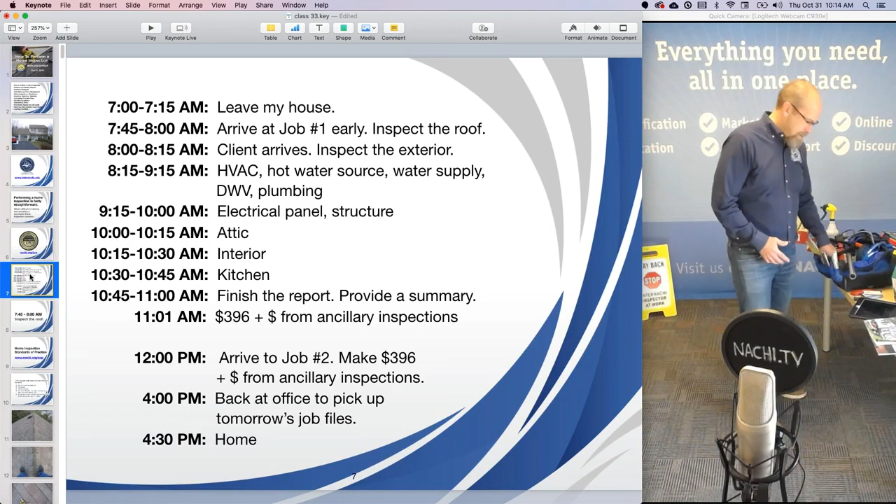That's great money. So I start early, 7 o'clock. I want to arrive at my first job early. Where I come from, if you arrive on time, you're late. So you arrive early and get your stuff, literally your tool bag, your appearance, get your business card out, get your tools ready, maybe even set up your ladder if you're going to use a ladder, ring the doorbell, introduce yourself, make sure the neighbors know about you, stick a sign in the yard, maybe some door hangers. Get yourself ready to do an inspection with your client, because arriving late is just a terrible first impression.

And in this business, you never actually meet your client until after they hire you, and you meet for the first time during your inspection, right? So you want to arrive early so that you're not sweating and you're kind of calm and ready to go.

Well, what I did was I arrived early and introduced myself to the seller if they were home occupied, and then I got up on the roof. I did a roof inspection. That's the hardest, most dangerous thing. You're not required to walk upon any roof surface, but you're required to inspect the roof. So I did the hardest thing that didn't require me to meet my client, or meet anybody. I'm on my own, so I go up on the roof.

If I had extra time, I'll start the exterior. And by the time I get down from the roof inspection, from my ladder, my client's there with me. So my client arrives around 8, right? And we inspect the exterior together. And it's only about 15-20 minutes to inspect the exterior.

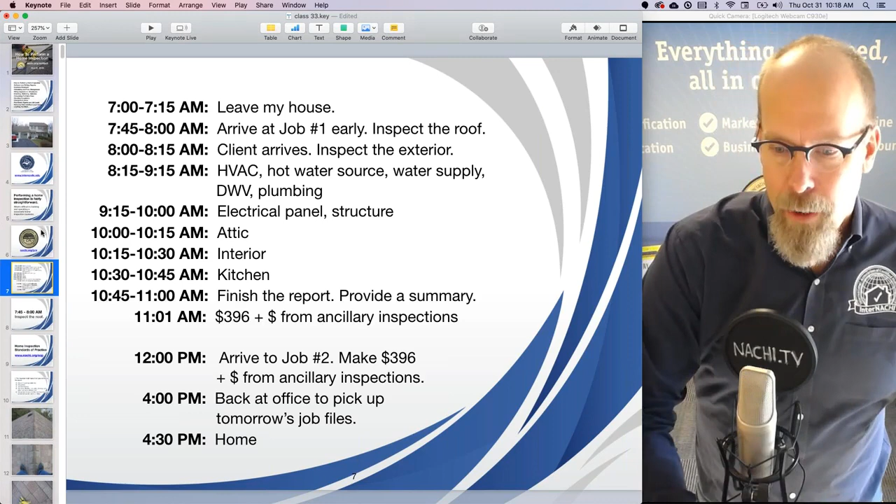And at about 11 o'clock, I'm finishing up my first inspection, my morning inspection, and I'm swiping a card, right? And I'm getting paid immediately. And my report is actually written, and I send that out electronically. You can do PDF or online report, but send it out because I am not writing my inspection report at night. So I'll show you how I do 2 inspections a day by doing 1 inspection with you.

So I get there early and I inspect the roof. You're required to inspect the roof. You're not required to walk upon any roof surface.

It's dangerous to get up on a roof. Stay on the ground if you can.

Home inspection standards of practice. I use this as a guide, as the foundation upon which to build a very successful home inspection service. It's successful because it guides me along. It tells me what to inspect and what's not required to inspect, and it helps me reduce my mistakes and my exposure to liability. It's a checklist, and if you go there, it kind of looks like this.

So here's the InterNACHI Home Inspection Standards of Practice, and here are the sections: roof, exterior, basement, heating, cooling, fireplace, and attic.

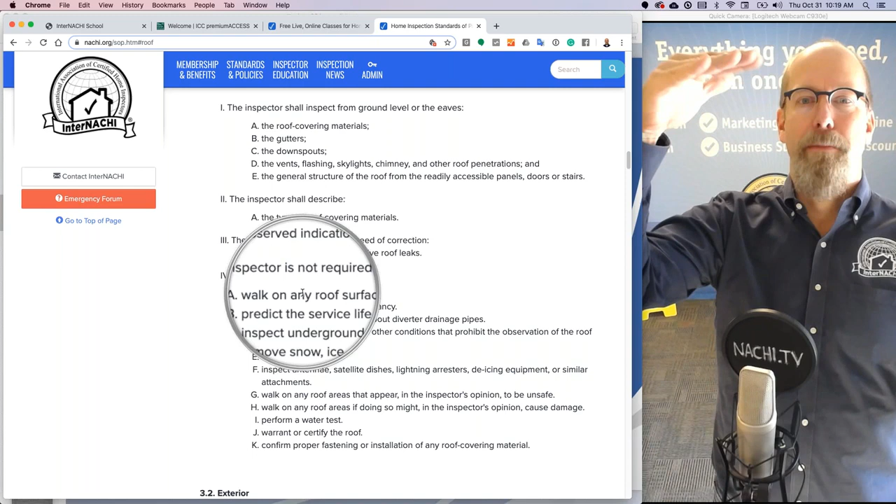And here's the roof. You click the roof and it says the inspector shall inspect from ground level or the eaves. An inspector is not required to walk on any roof surface, even if it's a flat roof on a 1-story building, a pizza shop or a condo. 10 feet up, flat roof—nope, you're not required to walk on any roof surface, according to the InterNACHI standards of practice. If you have a local standards of practice, you ought to refer to that.

Okay, so that's at nachi.org SOP. Let me show you what I use—let's see if I can get this to work. I use this as a guide.

So I have my... let's see. If I can get this to work, I'll show you my software.

So here's my inspection software on my phone, and so I go to my report, and here are the things that I'm required to inspect. This is mobile software on my phone.

Let's open it up a little bit. It's a brand new report, so I haven't even taken a picture of the house, but I could actually if I wanted to. So I take a picture like that.

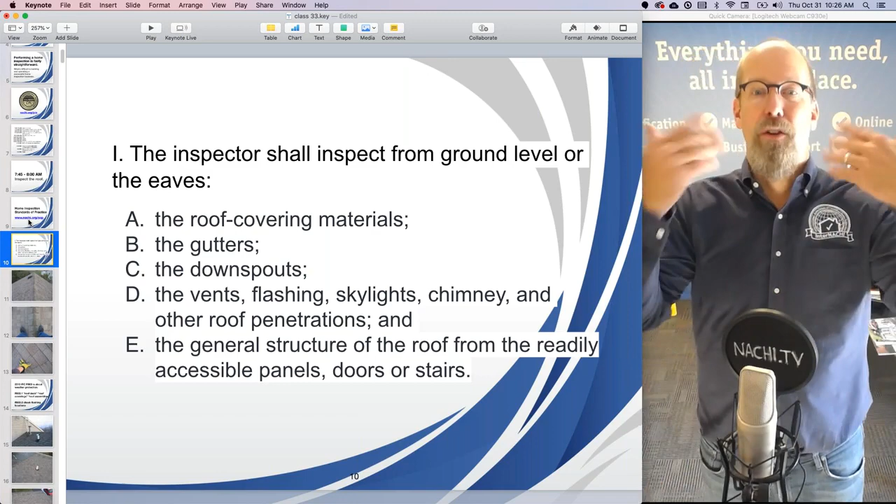So that's an example of how you can be technically competent at performing an inspection, but kind of miss out on the business strategy. And you're wondering why your phone's not ringing, because there are other inspectors who are providing incredible value. In business, you have to figure out how to provide incredible value that's greater than the cost of getting that service.

According to the standards of practice, you're required to inspect these things. So I get up on the roof. Again, you're not required to get up on any roof surface, but I get up on the roof because that's part of my brand. I make sure that picture and that picture are in my inspection report, which are passed around, and I make sure those are on my website as well, and part of my marketing flyers that are designed by the InterNACHI member marketing team, all the design work is free.

And if you wanted to get very good at technically what is required to inspect, maybe based upon code - we're not code inspectors, we don't say code, we say things like standard or best practices - but if you wanted to know what does the code book say about inspecting a roof, well that's an excellent question. I refer you to the International Residential Code. The most recent iteration is the 2018 IRC, and section R903 is about weather protection.

They talk about 3 things: roof deck, roof coverings, and roof assemblies. And you ought to consider using those terms as well. So roof deck is that which the roof coverings rest upon. You have asphalt shingles, and that's roof coverings, and they rest, and are fastened to and adhered to the roof deck. That's the structure that you walk on if you're going to walk upon any roof.

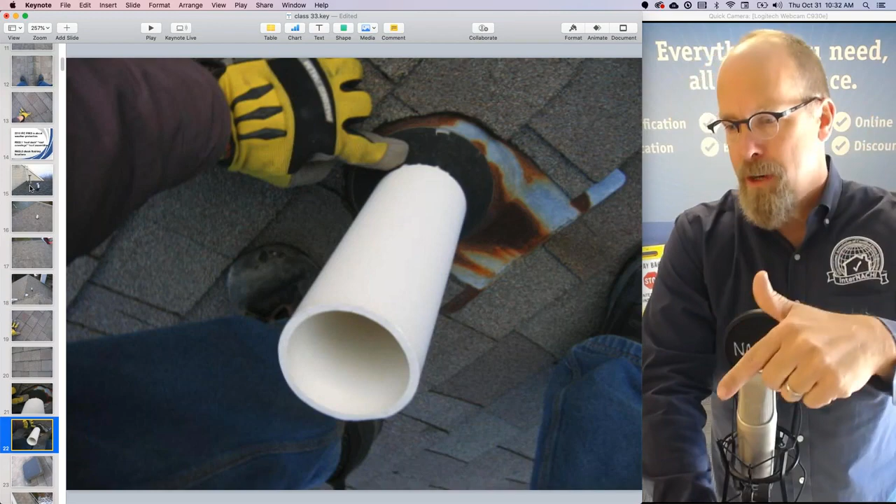These are pictures that I took during inspection. I take pictures of every plane, every surface, every component—there's the roof covering. There's my finger touching the rubber roof membrane around the vent pipe that penetrates through. Flashing is required, and if it's torn or damaged, that's a defect. It's not a minor defect—homeowners don't have the skill set to replace or fix something like this. It needs a professional, so that's a major defect. We'll go over some terminology about the differences between them.

There's a roof vent, the gutters are filled. That gutter looks okay, I like that shot. It kind of proves that I was there up high where no other inspector goes. So that's part of my brand.

I use any kind of ladder to get up there—there's a collapsible ladder. I hate that they use that term, collapsible ladder, because it could collapse. But just to get up to the very top, I'll use anything I can. Drones are great, sticks, painter sticks are great. Watch, don't get electrocuted—it shouldn't be metal, it should be non-conductive material. Binoculars, anything—you've got to inspect the roof.

And so I get up on a roof because, well, I built homes. Before I was a home inspector, I was a builder, and I learned how to do it safely. So I have the experience, the skill set needed to get up on a roof safely. I don't recommend you doing this. However, you have to figure out how to beat me in the market if I have that advantage over you. If there's a value proposition that your home inspector is going to get up on any roof surface, you have to figure out how to beat that in the marketplace.

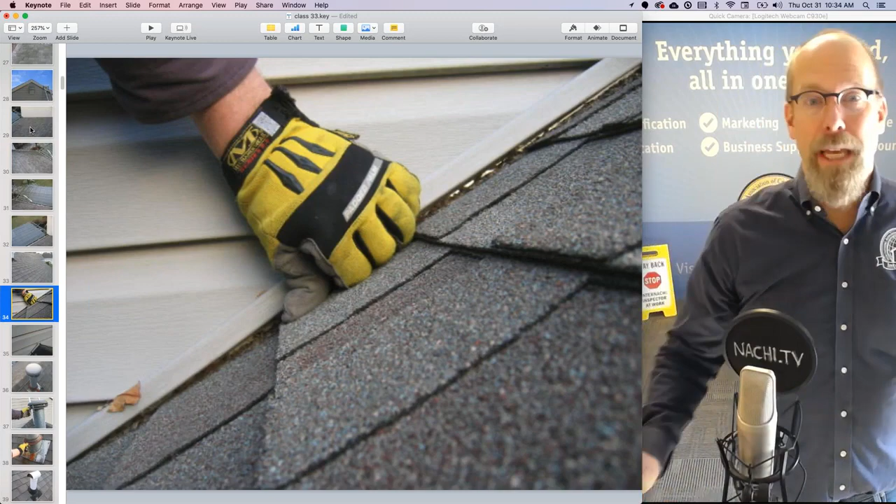So there's the sidewall—there has to be flashing there. It's hard to see the flashing in those areas because it's covered by the siding and the roof covering, but that is an attempt of me to confirm that there is some type of flashing there. I can't see everything, but I just want to confirm that there's some kind of step flashing installed.

But for gas, it's 2 feet.

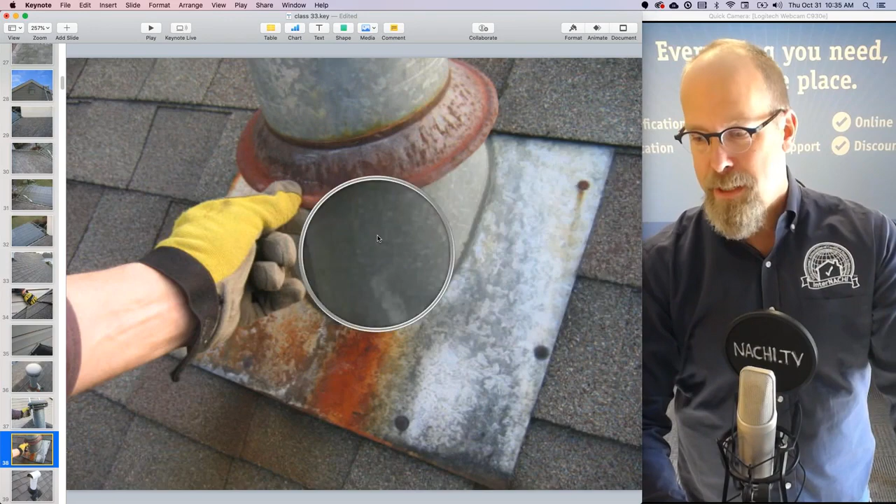Wind-driven rain can go sideways. It's very easy for water to go here. There's 4 to 6 inches of distance to get to the hole for water to penetrate through. These are not sealed. They really shouldn't be exposed. It wasn't installed very well.

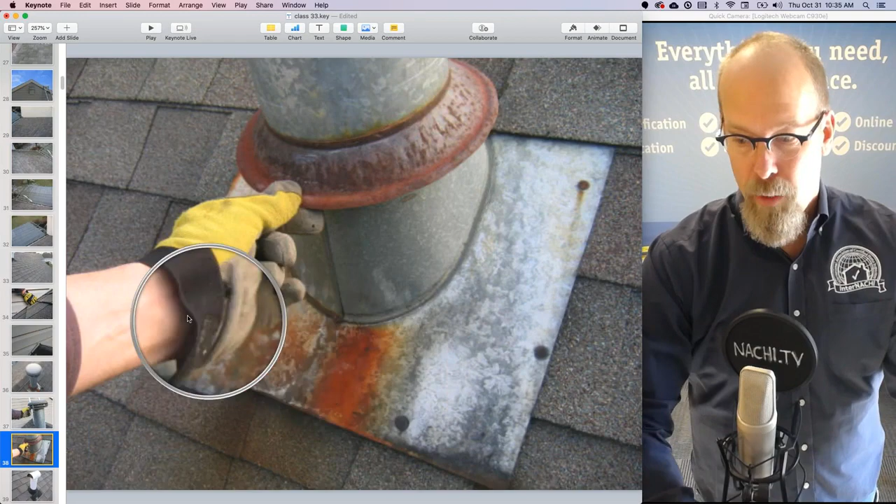I would have done it in a different way where this shingle row comes all the way across and this is all shingle covering, and you only have a little tab here and you don't even have to fasten it. So there's some tricks to doing flashing well, and I don't think this installer did it well.

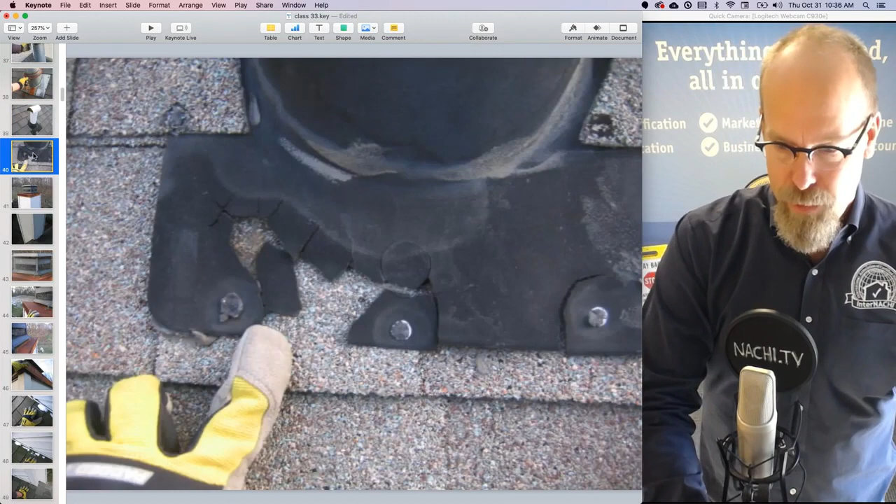So I'm going to pay attention to the underside and see if I can get underneath and look for water stains. If there are water stains, I'm going to call it an active roof leak. This is a problem. This boot here, this flashing rubber is just destroyed. And any roof nail fastener that you can see the head of is a potential water entry point, and that's a defect. It's a major defect because most homeowners can't even get up on their roof. So you need to hire somebody to get up on there.

I don't like the staining rust. It's not very old. I'm going to tap it with my screwdriver, but I don't want my screwdriver to go through anything that's rusty. This could be prepped and painted to preserve the integrity of the metal capping. So that's what I'm going to ask my client to do prior to closing, and then they can negotiate over it on what to do.

You can't force any seller to do anything. So I'm working for my client, and that's a concern that I have. There's step flashing at where the sidewall of the chimney meets the roof covering, roof surface. And that's about it for my roof inspection.

Angela says, seems like an awesome schedule. It just seems unrealistic with the way clients schedule with me and their realtor schedule. Yep, you ought to, I would just directly ask, if you're working with real estate agents, why don't you ask, what would be a good schedule for your best home inspection experience? Let the real estate agent tell you that, yeah, I really like 8-hour home inspections. I've never heard of an agent who loves a really long inspection.

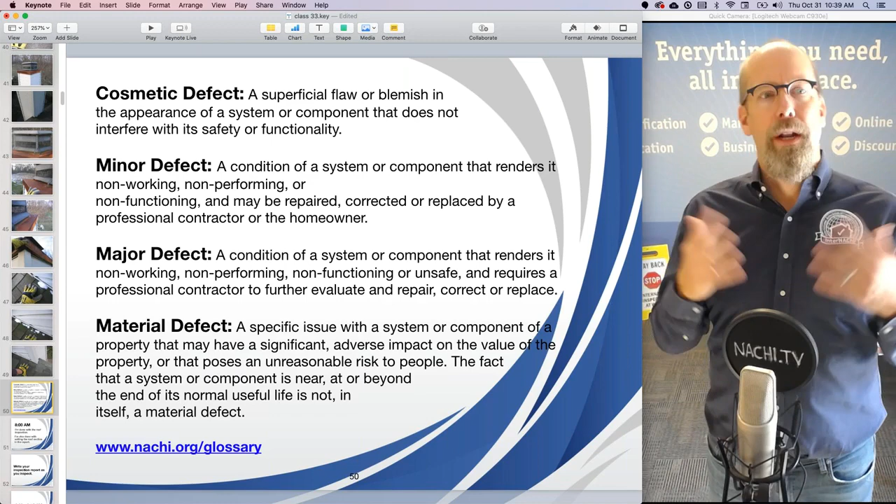Business strategy is to address your client while they're there. If they have a concern, I want to address it right now. I hate when my clients are not there, because inevitably they'll have a series of questions about what happened at the inspection - what did it smell like, what did it look like - and they don't know because they were in California and I was in Pennsylvania or something like that. So I want my client with me.

That's why video is great for absentee clients. You do a video, you do a body cam. I got a body cam somewhere around here, and you record everything and play the video for your clients. You want to address your client's needs as efficiently as possible, because that could be a drag on your process.

Which program are you using in your report? I like HomeGauge, I like Home Inspector Pro. There's EZ, there's Horizon, there's 3D. I have on my phone Spectora, spectora.com. Go to nachi.org/Spectora, and you can find some information there and a video about this software. So I try to learn every software that I recommend, and right now I'm learning that software.

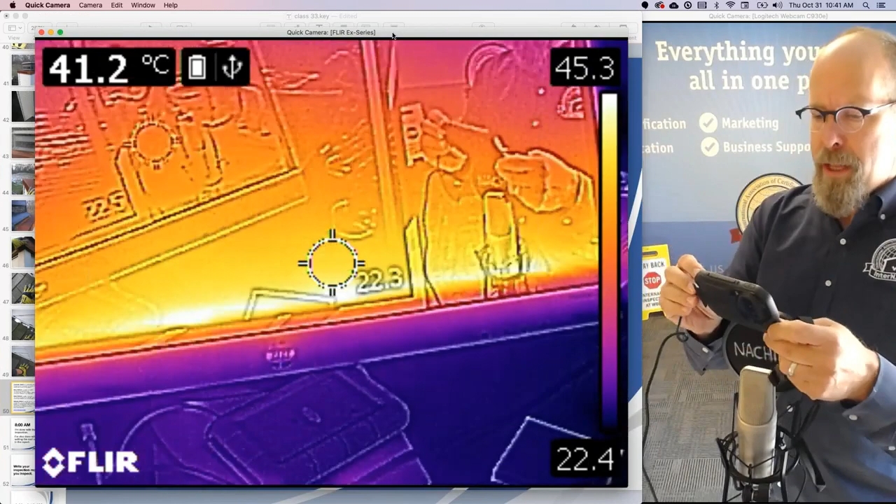So here's my infrared camera. And I use infrared because it helps me do a better job as an inspector. And if that's one of the main purposes, helping me do a better visual inspection, then I'm not really going to invest a whole lot of money into a camera that's going to be kind of like a flashlight. So an infrared camera is like a flashlight. Don't freak out about infrared.

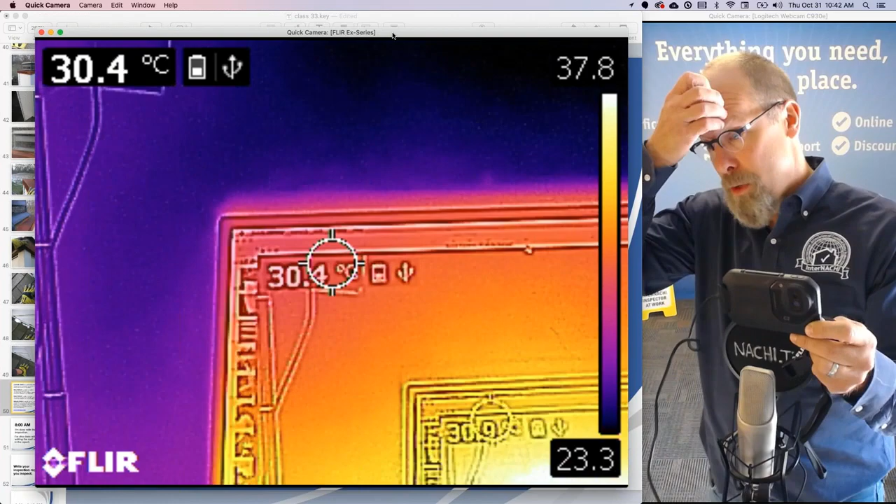This is a FLIR C2, one of my favorites. The C3, I'm having problems with the Wi-Fi and the connection between that and my computer, but the C2 is really cool. There are others, I think an E5 or E8 or E6. The more money you spend, the more you see, basically. But I see it just fine with this infrared.

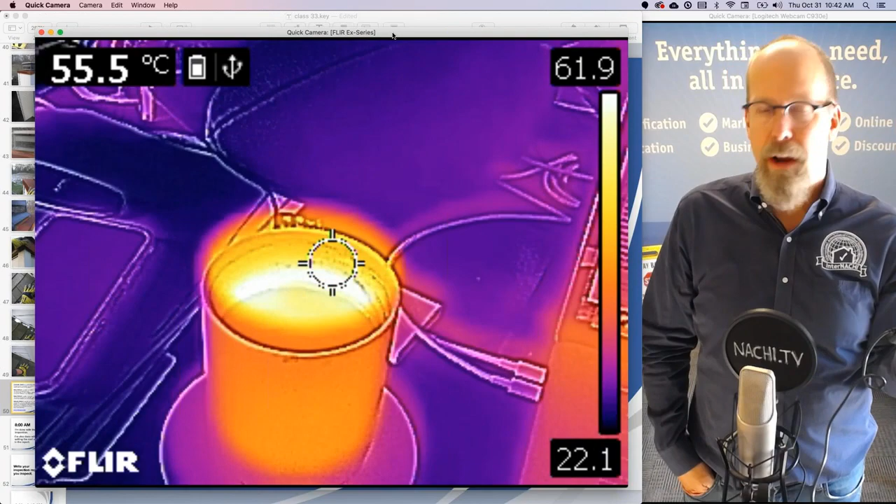And there are things that you have to learn how this works. You don't want to interpret images incorrectly. So you want to make sure that you are using the infrared to help you see things that you wouldn't be able to see otherwise. And it's like a flashlight. The word flashlight, is that a flashlight right here?

The word flashlight doesn't appear in the standards of practice. So one could argue that using a flashlight during a home inspection is exceeding the standards of practice. That'd be that one. So here's a flashlight. It's a really good flashlight. And it allows me to see things I wouldn't normally be able to see without it. So a flashlight allows me to see under, in that corner, under the table, right? Because without it, I can't see much. But with it, I can see things I wouldn't normally be able to see without using a flashlight.

And every home inspector is okay with using a flashlight, right? Same thing with infrared. An infrared camera allows me to see things I wouldn't normally be able to see without it. And there's the table there. And the cool thing about infrared is I can see things that are cool and warm. It's temperature differences. So that is a cold area right there. I bet there's a lack of insulation underneath the wall outlet.

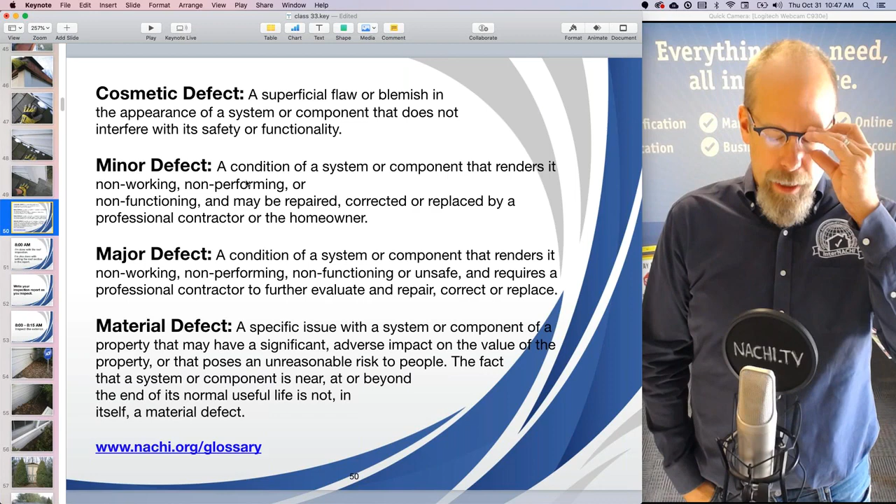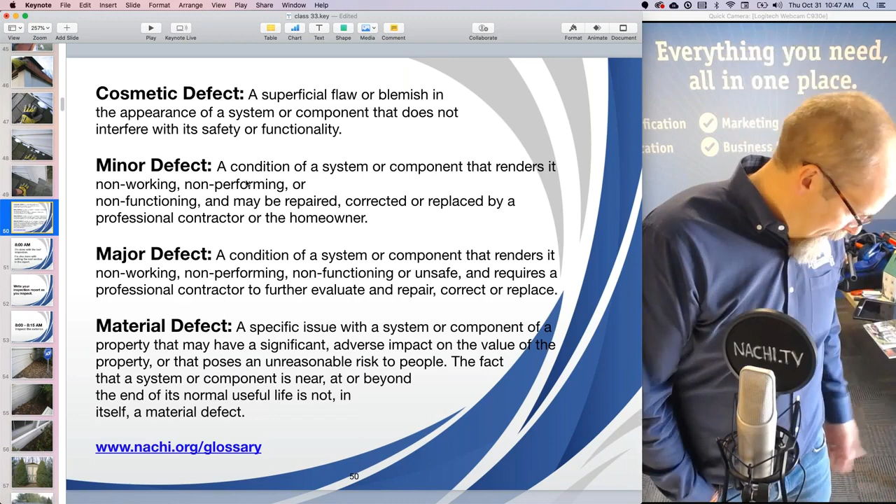A minor defect is like a dirty air filter, and a homeowner should be able to do it because it's a maintenance kind of thing - air filters can be changed out. Cosmetic is something that really doesn't show up in our report; it's not really part of a home inspection's scope. It's like a burn on the carpet from an iron, or a stain, or a hole in the drywall from a doorknob hitting it. It's cosmetic - I put it in my reports as courtesy only.

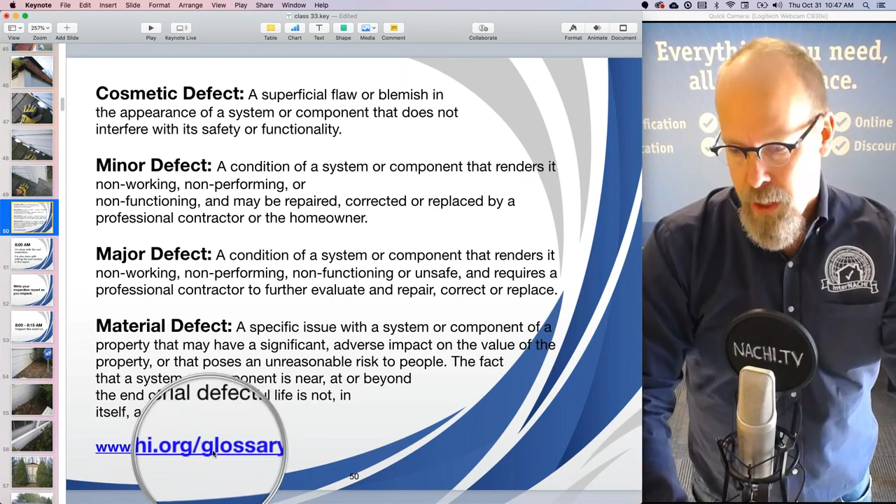These terms are defined in our glossary at nachi.org/glossary if you wanted to use them. Remember, we talked about roofing terms - roof coverings, roof deck, and roof assemblies. These terms are in our glossary, nachi.org/glossary.

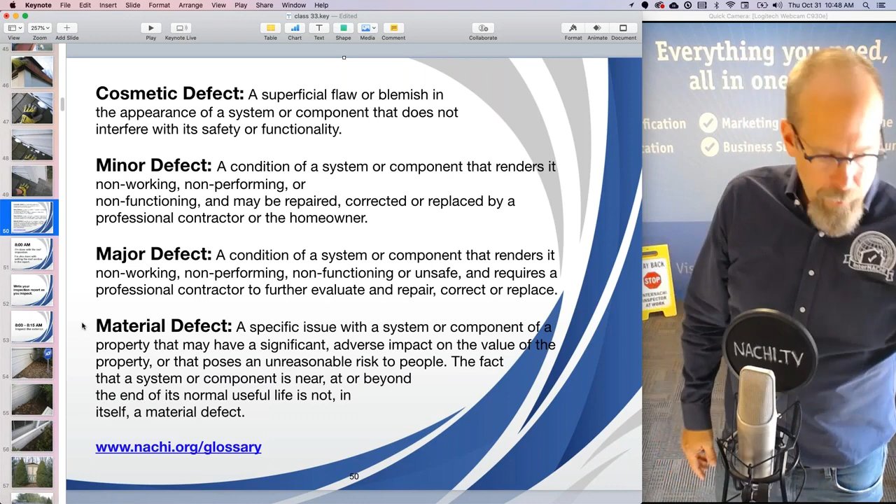Are you required to find every defect in a home? You're a home inspector, right - isn't that the purpose of having a home inspection, to report upon all the defects in the home? No. A home inspector is not required to find all of the problems in a home. A home inspector is required to report upon only those defects that they both observe and deem to be material.

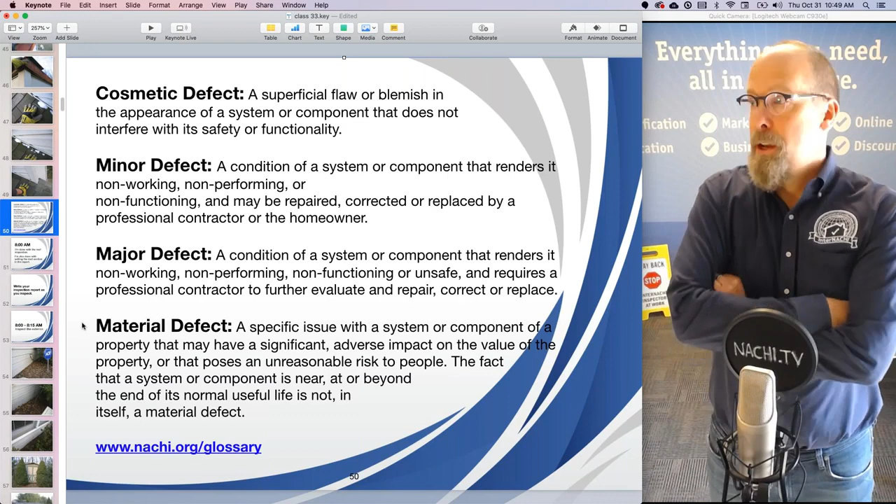So if there's a terrible defect above me right now and I don't see it, it won't be in the report. I'm required to report upon things that I see within the scope of my home inspection and that I deem to be material - so bad it's going to hurt somebody or have an adverse impact on the value of the home. If none of those things happened, it's not in the report. I can't see a defect behind that wall - that's why you need everything in one place. That's InterNACHI - everything you need all in one place.

The seller moves the cabinet as they leave the house. The homeowner comes in - there's a huge crack in the foundation with water streaming out of it. Nope, I didn't see it, couldn't see it, can't report upon it. Now let's say I did see it - let's say I saw a vertical hairline crack, no displacement, no separation, no water. I saw the crack and reported upon it - took a picture of it, crack in the foundation wall, hairline crack or something like that.

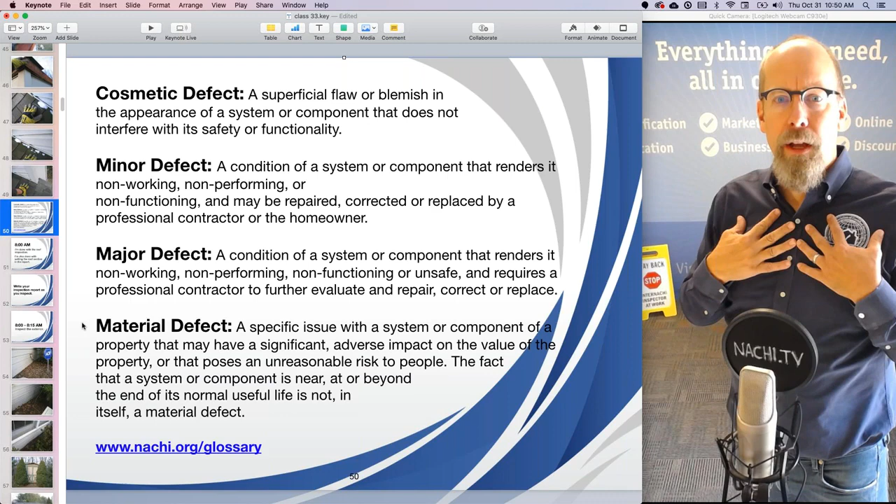Later on, it moves and leaks water. Well, I'm not required to predict future events. If the foundation looked in good shape when I took a picture of it, I'm required to report upon the condition at the time of the inspection. If it leaks water through that crack a week later, I am not responsible for it. This is not a warranty or a guarantee.

So if you get a call saying, hey, I just moved into the house and there's a crack in the foundation, you should say, wow, I don't think I saw a crack in the foundation - I'll take a look at my pictures and my report. I don't remember a major defect in the foundation. Could I come over and see what you're seeing? Yeah, come on over.

And when you come down into the basement or somewhere in the house and there's this big defect, from 20 feet away, you should go, holy cow, look at that. You know, that wasn't there during my inspection, right? It must have been covered up or something.

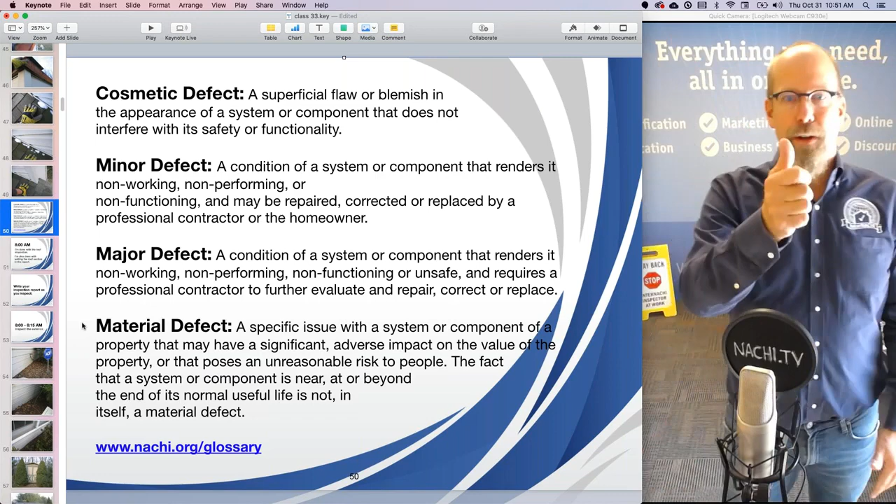And then you take out your pictures and scroll through them, because you take pictures of everything. Take pictures of the whole room. I'm trying to figure out how home inspectors can take a 360 picture and image. So you just click and move on. Every inch of every room is captured with a 360 camera. The 360 cameras are coming.

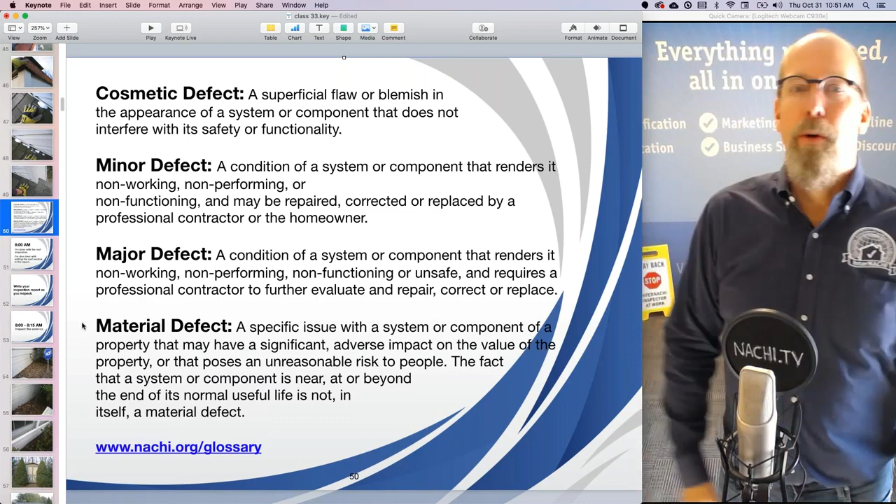So you want to document what you see in your report. And you're not required to report upon all the defects, only the ones that you both observe and deem to be material. Now that you know that, home inspection is a lot of fun. You're not required to find everything.

I'm going to use a flashlight, maybe infrared, to see more than I could see, to make my inspections a little bit better. But I'm not required to report upon all the defects. There's so many defects in this room right now. I have no idea - could be electrical problems in the wall, could be water, could be mice under the carpet or something. I have no idea.

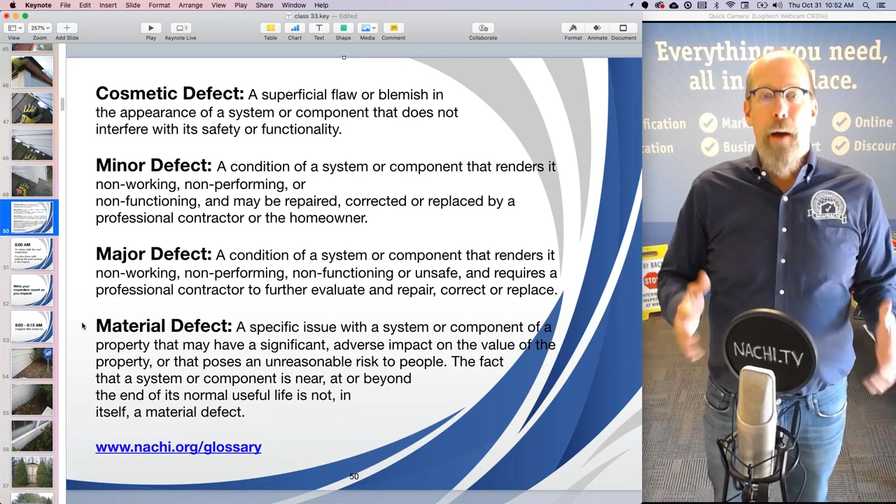I'm only required to report upon the defects that I both see and deem to be material, serious stuff. Now you can have fun making a lot of money.

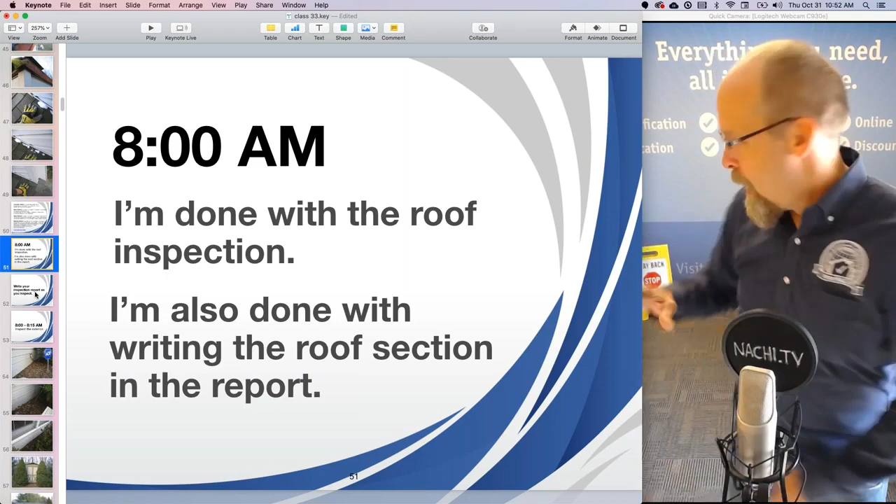We haven't even got to 8 o'clock yet in my first inspection. Let's go. I'm done with the roof inspection, right? I walk around, using my mobile software, taking pictures and video, writing the report. And before I step down from the roof, I'm done inspecting the roof, done taking pictures, done capturing video, done with everything.

And now I go down and meet my client for the first time after they hire me. Big smile on my face, shake hands, five business cards, because they're going to pass them out a little bit. Never give one business card, five at least.

So talk to the real estate agents and tell them about the roof. There's a couple defects on the roof. What do we have? The roof covering looks good. Gutters are filled. Rusted metal on the chimney cap. We have a flashing problem around a couple of the vent pipes. You think of anything else? No, that's about it. Would you like to go inside and take measurements and do things out there? You won't miss a thing.

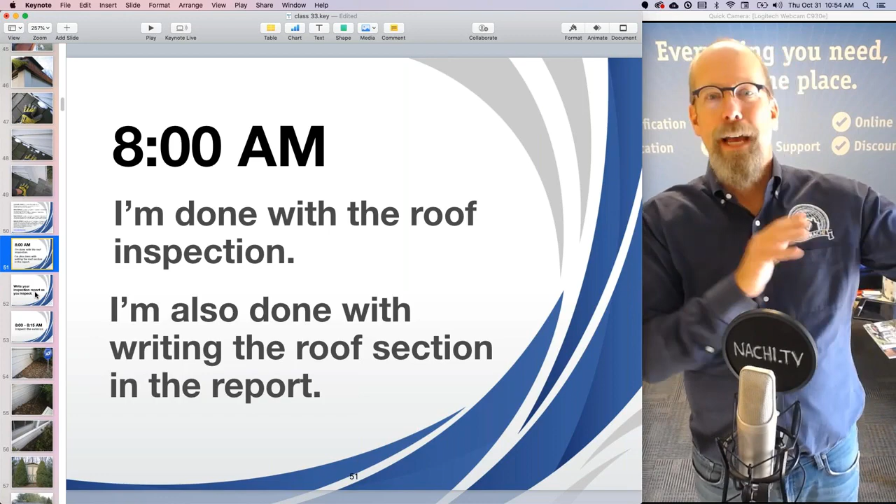I'm going to walk around the exterior and perform the exterior inspection, takes 15 minutes or so. I would love it if you come along with me, because we can address issues. About half of my clients just want to go inside. They want to get to their ideas of renovation and doing the kitchen, painting, carpeting, drapes, and all that stuff. And when I come in from the exterior, I tell them any defects I found, and then I go and do the other systems.

So write your inspection report as you inspect. I inspect the exterior in about 15 minutes. Let's do it, okay?

Let's see if we got questions here. Getting on the roof can damage the roof by disturbance or granular loss. Yeah, Angela, you can - especially on a hot roof, you can twist your toes, twist your foot.

Let's see if I can get it on camera. I'm not very good at this. So you can twist your foot like that and damage the granular surface of a hot asphalt shingle, so you don't want to do that. These boots are actually spongy soft. I'm not doing roof inspections in them, but you can find shoes that look really good and protect your feet, and are very soft for the roof.

Some folks use special boots and shoes just for the roof. I used to use sneakers for the roof, and those are really nice. If it's too hot to walk on and you think you're going to damage it, don't.

So it's possible to damage roof covering materials, especially like tile. I don't walk on tile, I don't do slate. Metal roofs, I'm careful with because I'm not sure what the roof decking is like - sometimes I'll step on a metal roof and be like, oh. So be careful. Asphalt shingles is kind of fun, but that's for me because I'm experienced and safe doing roof inspections and walking on a roof. Remember, you're not required to walk on the roof.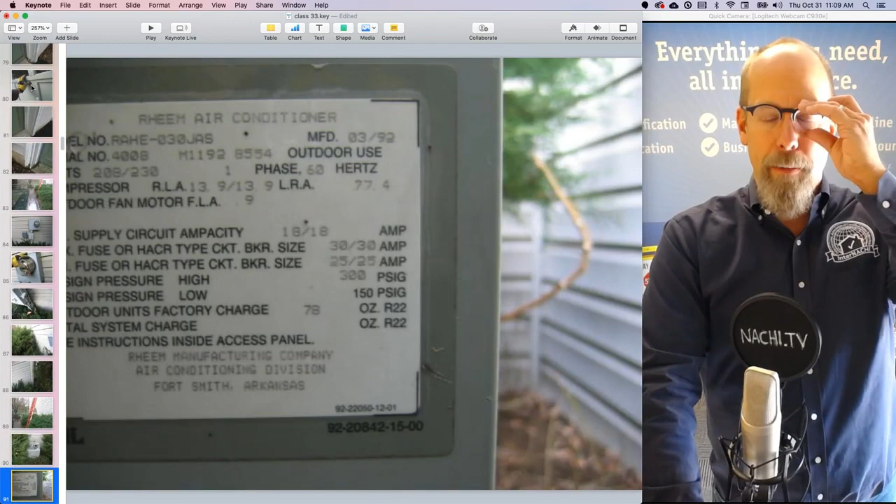I take a picture of the manufacturing labels of anything I can get my hands on. I don't put it in the report, but if I need to refer to it, I could. There's the electric disconnect, should be in sight of the air conditioning unit. There's a refrigerant line, the large line is a suction line, it's cool and needs to be insulated. The smaller diameter line is the liquid line, should be sealed where it goes into the house. There's a discharge pipe, plastic tube, and it's old and nasty. I guess there's a condensate pump near the air handler, so I'm gonna take a look at that.

There's a chimney and the siding, just taking pictures here and there. There's the gazebo wooden structure on the back patio area, the brick patio area. I'm gonna take a look at that. All exterior receptacles need to be GFCI protected.

There's the dryer vent, I think. So there must be a second floor dryer vent or something, or some kind of exhaust hood. I'm not sure, but I can't get to it closely, but there it is. I'll try to find something on the inside.

There's a small diameter PVC pipe, looks like a 3/4 inch pipe or something, 5/8, maybe an inch. I'm not sure what that's from. I'll try to remember, it's probably a condensate drain line. Now what would a condensate drain line be doing above a first floor window? Well, maybe the unit is upstairs, maybe it's in the attic and it's draining out. If it's in the attic, there's usually... okay, I'm not sure, so I'm gonna pay attention to this.

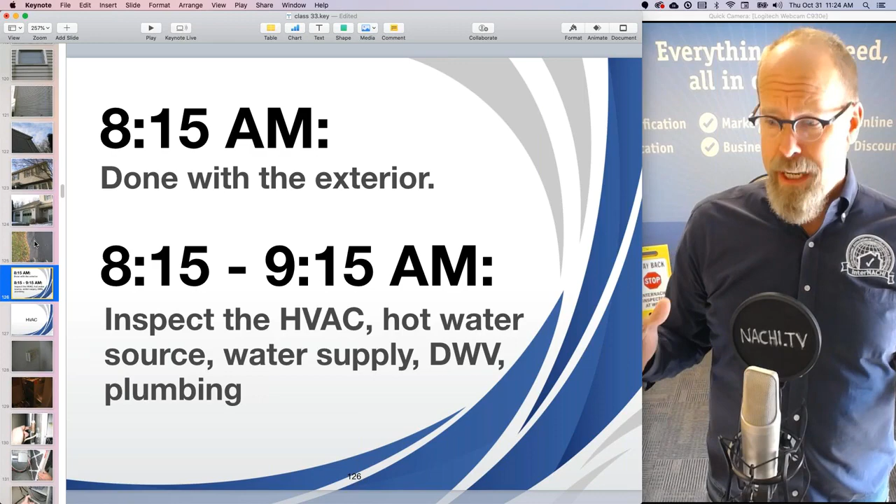Done with the exterior. Now I want to inspect for the next hour or so the big stuff: HVAC, hot water source, water supply, drain, waste vent, plumbing, and then I'll get to electrical and structure.

HVAC, there's a thermostat—take a picture of the thermostat. That's an old thermostat, should be programmable, it's not. There's the HVAC system, it's a gas-fired furnace. Remember the gas meter on the outside with the rust? There's a gas shutoff valve for every appliance.

Air filter—I show my client where the air filter is, the size, the direction, every 30 days, yada yada. There's how you access the air filter, the bottom panel comes out.

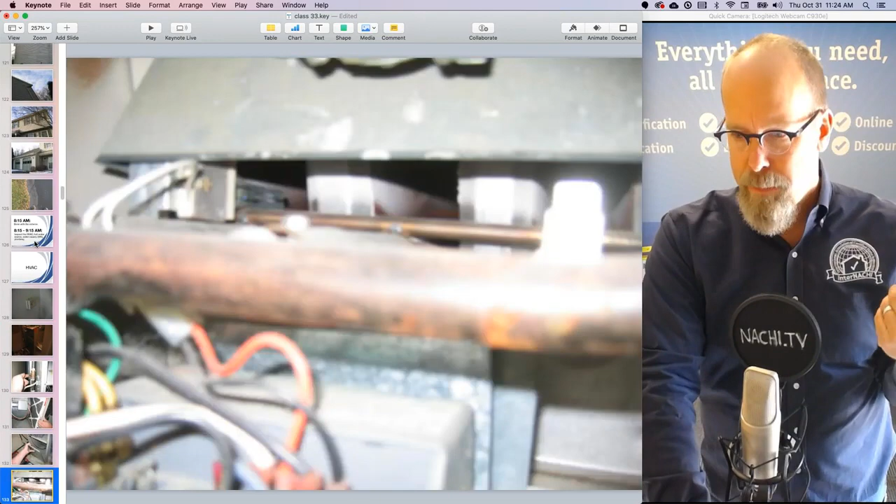There's the burners. This is a natural draft furnace, so the burners are open. They're burning combustion air that comes from the air of the house. There's a couple things you can pay attention to—just take our HVAC course.

I take pictures of every system and component. There's a lot of wiring on these old systems and the new ones, but there's a lot of sensors as well. This is the part of the heat exchanger—I like to take a picture of that because sometimes there's some funky stuff there. I don't see anything wrong.

There's no service switch, so it's hardwired in. How do you get to the air filter safely? A service switch would be really nice, so that's what that means—that's for me, to remind myself that there's something wrong here.

I don't have time to draw little arrows and circles and write text on my images, so I just point, use my finger—this is a great moisture meter as well, your hand. So there's no service disconnect. There's a refrigerant line, we saw it on the outside.

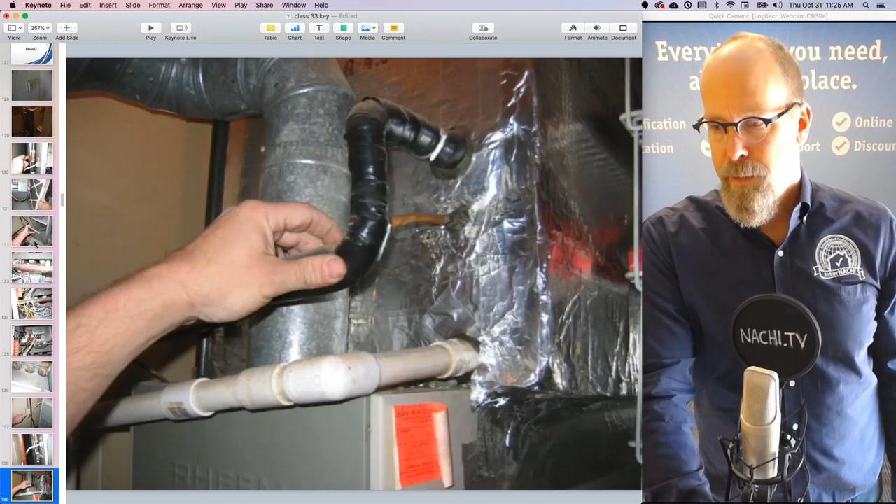There's a condensate line coming from the air conditioner, trap, draining into a condensate pump. Remember the tube on the outside was kind of nasty? The tube on the inside is kind of nasty too.

So I'm gonna recommend that be serviced and cleaned. And there's the vent pipe connecting pipe of the gas-fired furnace, the vent connector, or vent connector pipe as I like to say, the metal pipe that takes the exhaust gases from the furnace appliance into the chimney stack. And we saw the chimney stack on the roof, remember? The collar was rusted.

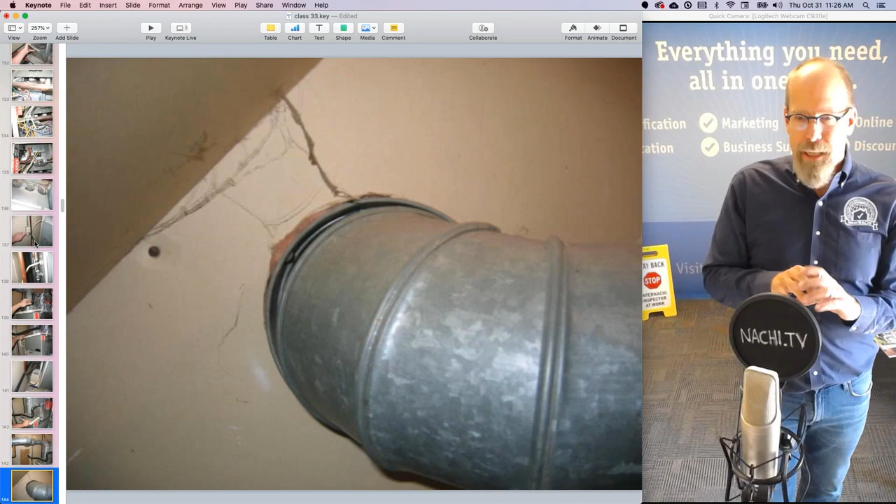I don't like the clearance. There's no clearance here. I'm not a code inspector, but I'm gonna call this out because that thimble is like a double protection, right? But I'm not sure if that should be a 1/2 inch clearance, a 1 inch clearance from the drywall or not. And it looks like the drywall was installed after that was installed. I don't know what's going on. I don't like combustible materials near a really hot furnace. And the exhaust pipe, we're talking hundreds of degrees, the exhaust gases coming from a natural draft furnace heat exchanger. That's hot, man. So I'm gonna call this out.

And if the HVAC guy comes and says there's nothing wrong, great. Let that technician say everything's fine, there is no fire hazard. That's fine, I can do that.

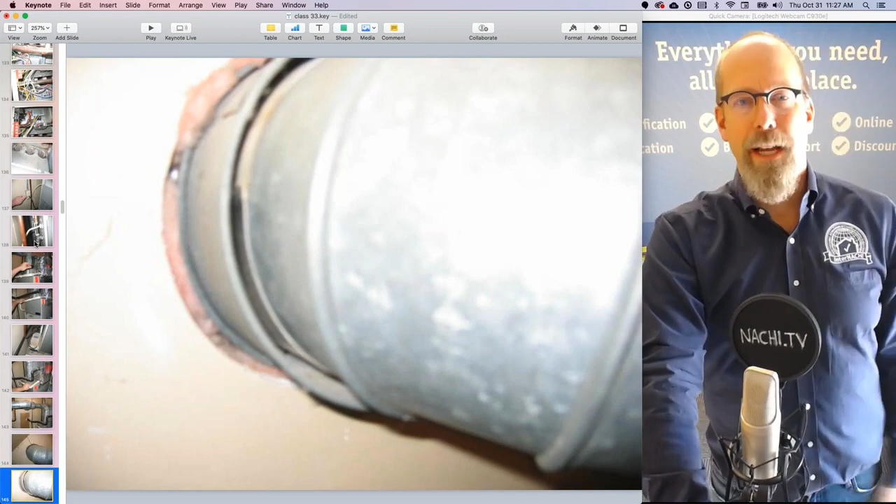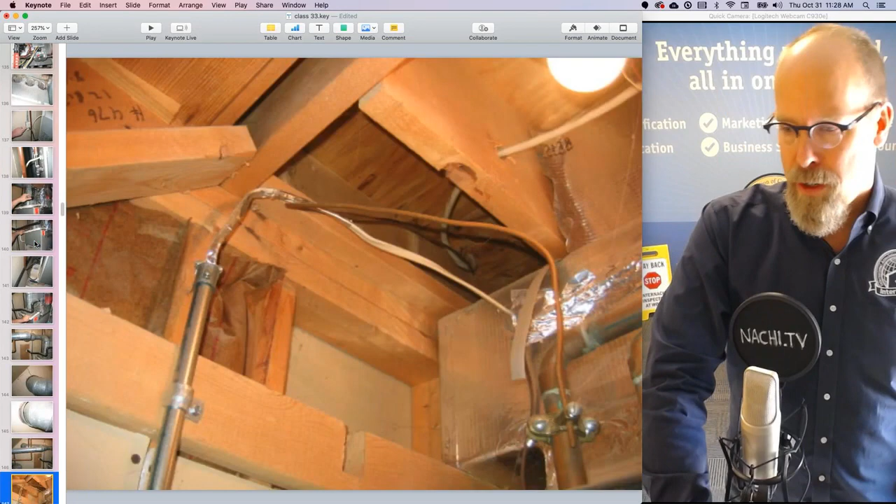And I'm kind of concerned about the slope too. That furnace there and the flue of the hot water tank are coming in at a weird angle because the pipes got in the way. It's kind of flat. So I've got two concerns now: the rusted collar at the top, poor flashing around the chimney stack at the top, remember in the webinar? And then I've got this vent connector pipe that's almost level, and I have an inadequate clearance from combustible materials. I've got really great reasons for recommending HVAC service and cleaning and further evaluation.

Drain waste vent plumbing, I can't find any. Everything's finished and there's no basement. So I go down to the first floor and I'm looking, there's no basement, no crawl space. So those foundational cracks went down to a foundation that wasn't a walk-in basement or a crawl space. And this is the only pipe I see, and it's not part of the plumbing. It's a radon mitigation system pipe, because there's a little sticker that says something about radon and there's no meter.

There's no sensor, like the manometer, with the red or blue liquid in it to show that there's a radon fan sucking the air into the system. There isn't that. And it doesn't look like it's labeled well or properly, or I don't know where this point is. I'm gonna pull out my phone. I have a checklist on how to inspect all the features of a well-performing radon mitigation system. I bet this system was installed a long time ago. It doesn't have a couple features I'm looking for, like a manometer and a good sticker that's easily readable.

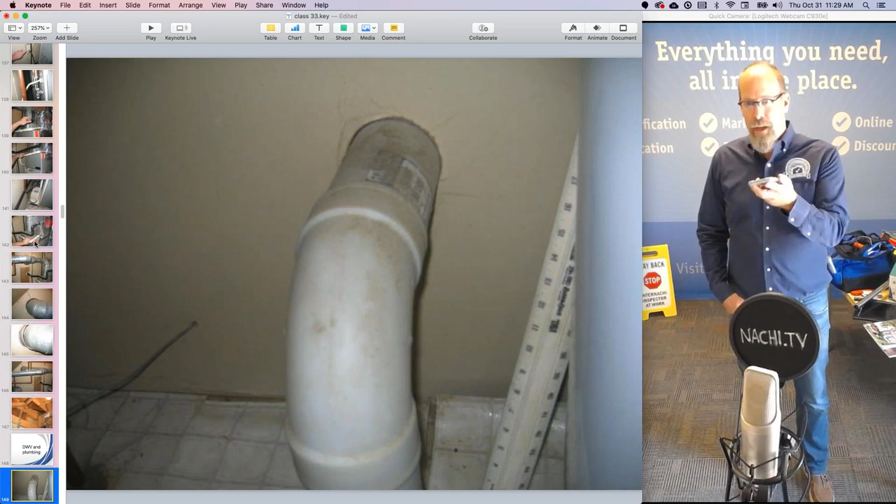That's one of the things, it needs to be labeled. You got to tell people this isn't where the sewer is, this is a radon mitigation pipe. And the type of pipe might be wrong, it's schedule 10 instead of 40. And I can get that from my checklist.

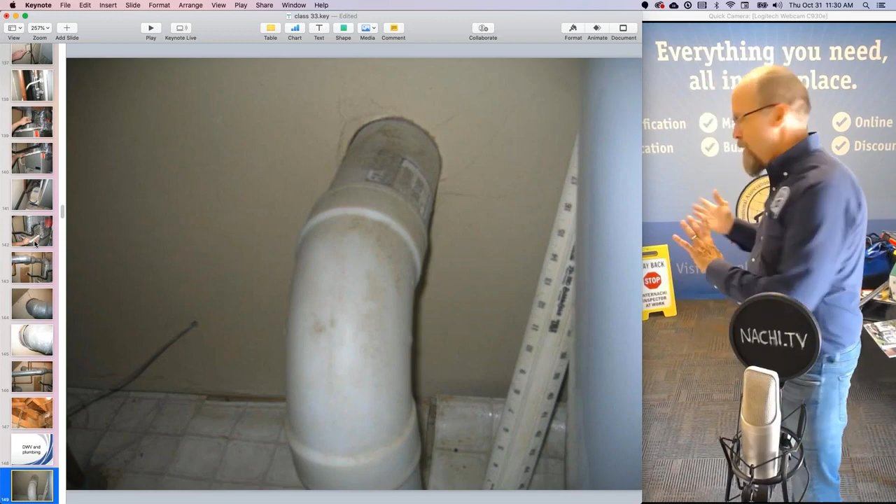So I'm going to turn to my client and say the magic words: while I'm here. While I'm here performing a home inspection only, would you like me to inspect this radon mitigation system? I have a checklist here according to modern standards, and we can see if there's any problems with the installation of this system. There could be some things wrong, I already see 3 things that make it a concern for me. We're not sure if this is performing well, and there's only one way to know if a radon mitigation system is performing as it should: test it. So, magic words: while I'm here, why don't you hire me to inspect this radon mitigation system itself, the pipes, electronics, and the fan. And while I'm here, why don't I perform a radon test?

Oh, this is ancillary inspections, and this is where profit is. So I'm here performing a home inspection, and I come across something like a radon mitigation system, and I have an opportunity for my client to get more information. And I can provide that information while I'm here at a low cost.

Because while I'm here, my prices for while-I'm-here ancillary inspections are a little bit lower, right? Because while I'm here, this is just basically profit for me. It's only going to add a few more minutes of my time, but a lot of gross income.

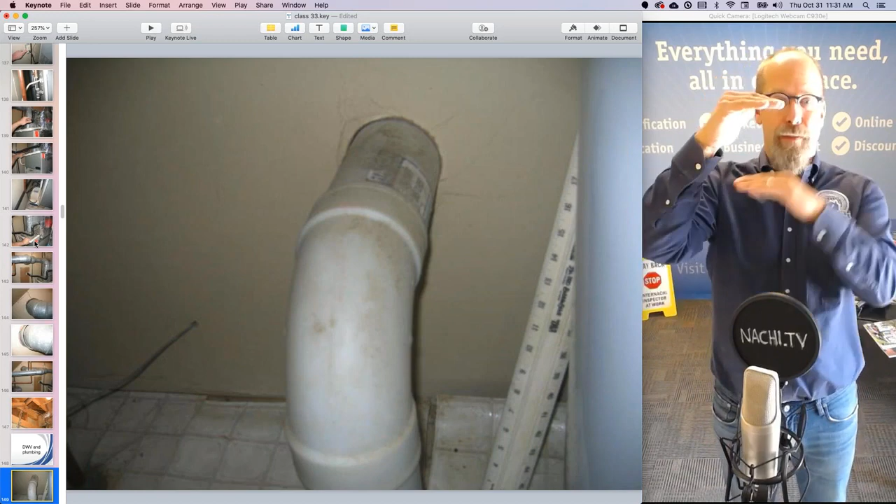So in business, think of a fraction to make money. This is a very simple, simplistic idea, but you may get the point. Remember in grade school math, a fraction has a numerator divided by a denominator. On the fraction, the top is your gross revenue divided by what? Time. So what you want to do is have a huge numerator, as much gross revenue as possible.

So that's home inspection, and you attach an ancillary radon mitigation system service and an ancillary radon gas test, right? That's a couple hundred dollars more, divided by your time. If you don't expand your time, that's good. You're making a lot of money in a little bit of time.

What if it was flipped? What if you're making $200 on a home inspection and you take all day long, 6 hours to perform a home inspection? That's bottom heavy. You don't want to do that.

To be profitable, you want your gross revenue really big divided by a little bit of time. And to be more efficient, you want to squeeze that denominator, squeeze your time. You don't want to run through a house and screw your clients by not inspecting everything like you should. You want to be efficient with your time.

And efficiency comes with one of these things, right? You want to be efficient with your time. A mobile device, mobile software, helps you reduce your time. And adding ancillary services, ancillary inspections, adds to your gross revenue, hopefully without adding too much time.

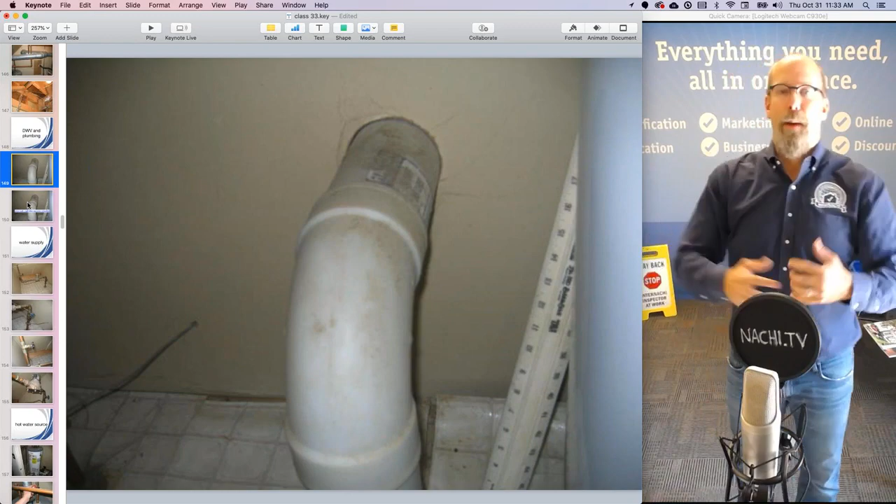And guess what InterNACHI does? InterNACHI has over 45 additional different types of inspector certifications, and they're all free and online. So if you wanted to be a certified home energy inspector — we haven't even gotten to the energy features of the house yet — you could turn to your client and say, you know, I'm a certified home energy inspector. Would you like me to add a home energy report to this home inspection?

It'll give you a lot more information about energy efficiency issues that I see and how to correct them in order to save money. On average, my clients who order a home energy inspection and report can save about $1,200 a year. That's a really nice weekend vacation for my family. Are you interested? While I'm here...

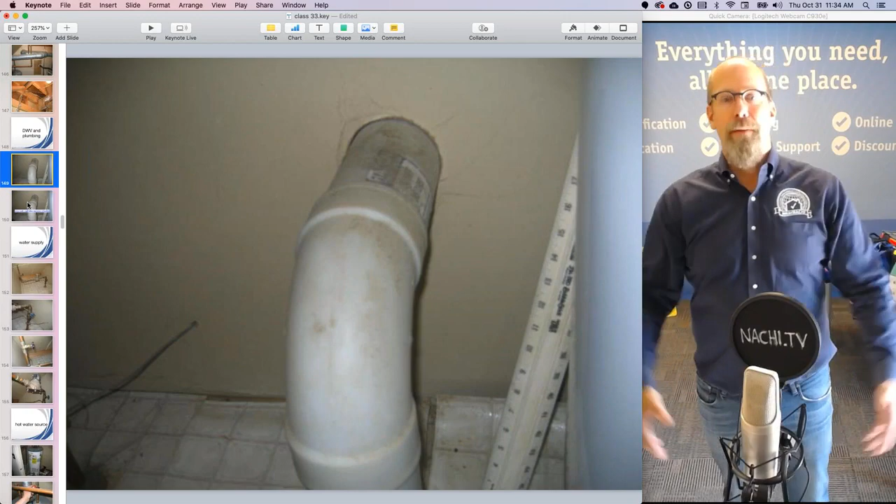So these are opportunities that you can offer — various types of ancillary services — and be trained and certified in each one of them through InterNACHI School, free and online.

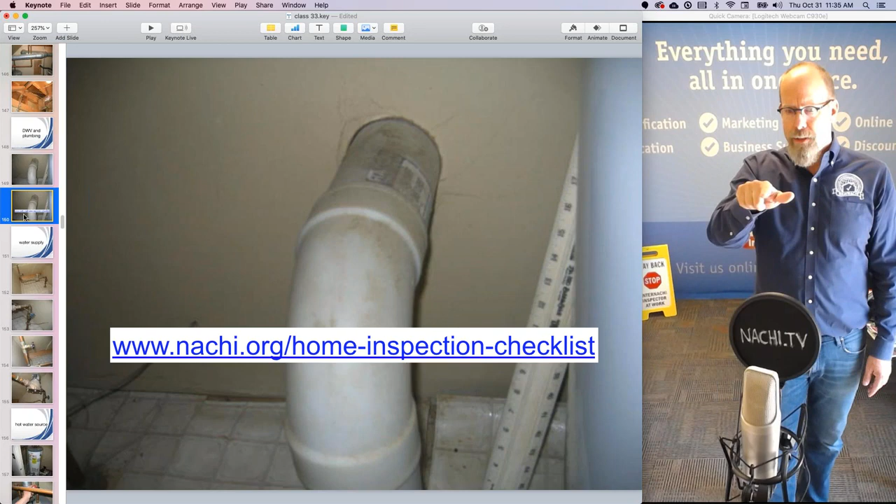Right there is nachi.org/home-inspection-checklist — I apologize for the long URL, it's like an SEO kind of thing. That's where you'll find the checklist to inspect a radon mitigation system. Just download it, it's free, and incorporate it into your software. Get ready to say, while I'm here, why don't I inspect this radon mitigation system to make sure it's actually working?

Let's take a look at the water supply. It's very easy, 30 seconds to inspect the water supply. There's a water supply coming in. Remember, there's no basement, so the water supply from the street is coming up through the slab-on-grade foundation.

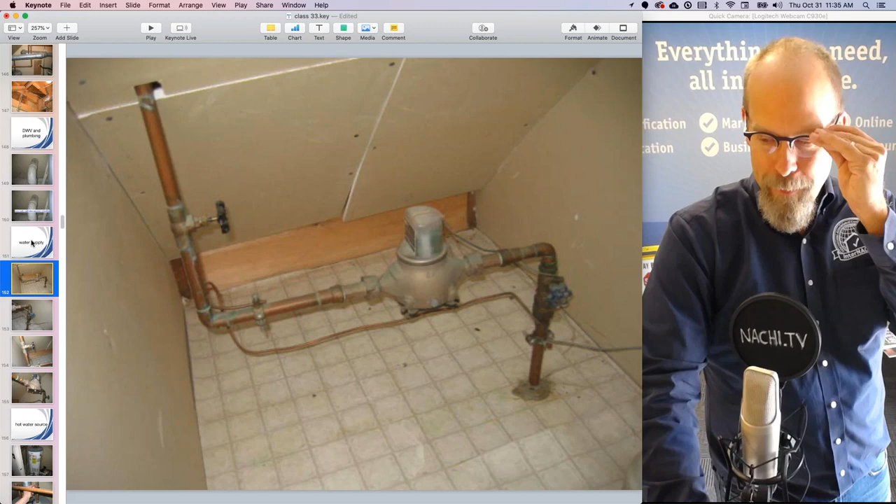So this is the lowest livable section. It's all finished and covered with drywall, and that drywall was installed after, so I can't see a lot of things. They put drywall up against a really hot vent connecting pipe from the furnace. Shutoff valve, jumper cable, bonding, water meter, another shutoff valve.

I don't see a check valve or pressure regulator valve. That's in my report. It's not leaking.

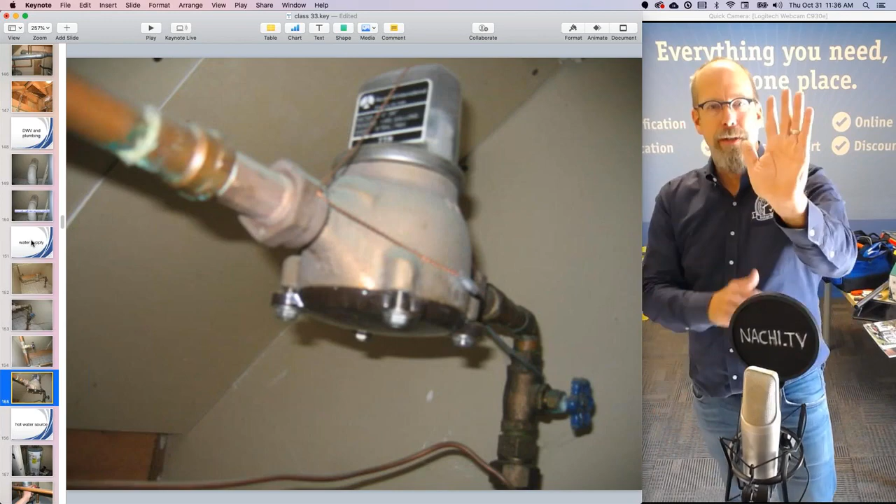The best way to determine if something's leaking is you use your hand, the best moisture meter ever invented, and just wipe the bottom. If there's watermarks, that's a leak, right? Because it's impossible to put your moisture meter underneath a bolt. So use your hand. I use my hand on every valve. If I'm looking at a bathroom sink, I open up the cabinet, look at the trap, and wipe the bottom of the valve and the bottom of the trap. That's a pretty good way to test for a water leak.

Water source, hot water tank, gas fired, shut-off valve on the cold line coming in. There's the temperature gauge—don't mess with it, but that's how you change the temperature. I document the temperature gauge. Someone accused me once of cranking it all the way hot. Turned out to be the plumber forgot—he was testing something and forgot to turn it back.

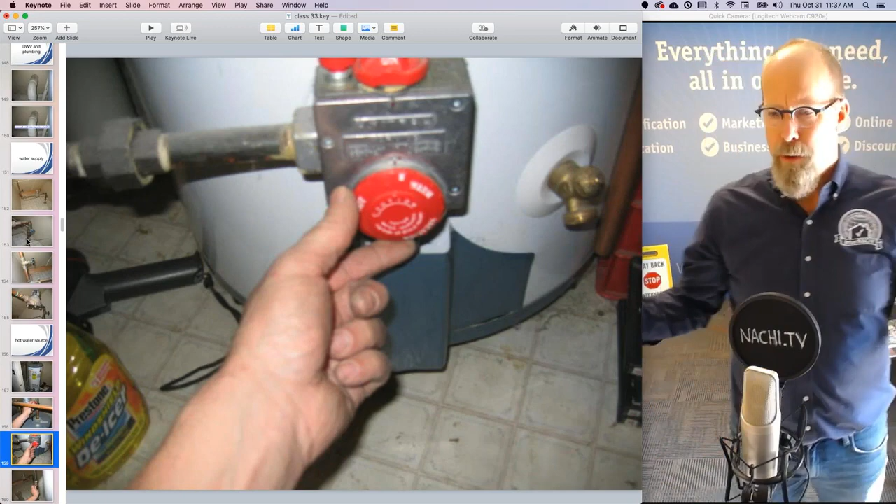The plumber was there at the end of the inspection. I was wondering what they were going to fix, so I'm putting it in the report. Document things prior and after. That's why I take a picture of the electrical panel before I touch it and then after I touch it.

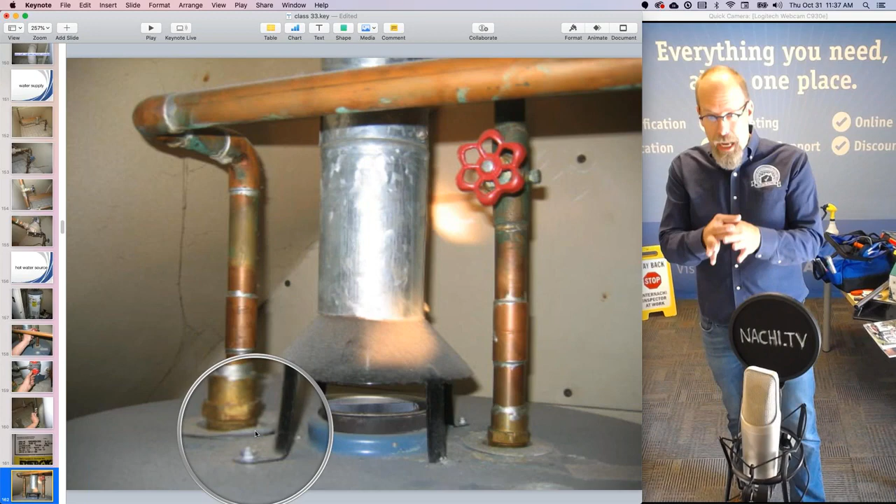Manufacturing label, natural gas right here—this is an indication of a backdraft of the flue. I'm not too concerned, but I'll put it in the report. That's a plastic washer, it could be removed, but it's there. It's not a functional thing, but it's melted, so that means we did have a backdraft. It was probably once, probably won't ever happen again. I don't know, it could have been—it's a natural draft, so these things burp a little bit. You can explain it, but I'm gonna put that in the report.

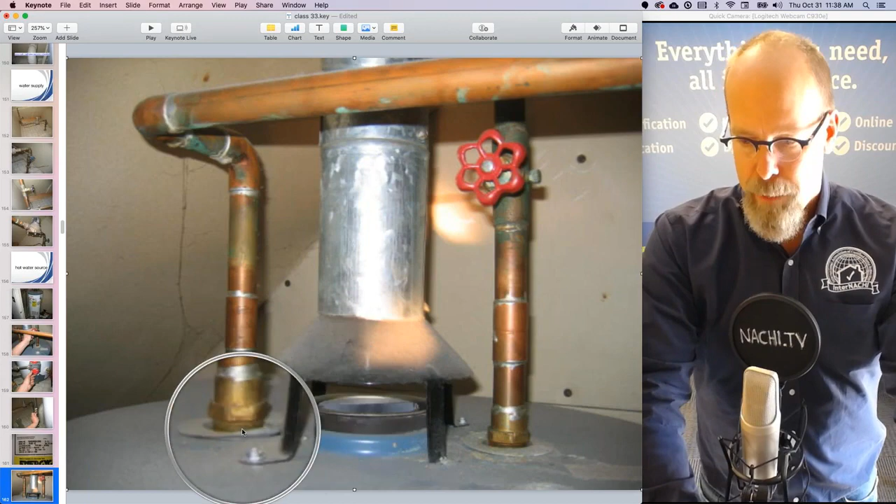There should be a carbon monoxide detector installed according to local code, national code, or best practices. Whenever there's a natural vent or natural draft, air from the room goes up into the flue pipe, and there's no fan. There's a possibility of it backdrafting with hot flue gases, and sometimes they'll scorch, melt, or deteriorate something close by. This hood is the natural draft vent hood, and it could backdraft and cause a problem like that—it's an indication of a prior problem.

So now I've got a plumber coming. TPR extension pipe—no leaks at the bottom, that's good. It should be extended to the floor. There's a couple things you should probably pay attention to on every TPR relief valve, like how it extends to the floor through the pipe.

How do you know what they are? There's actually 14 requirements of a properly installed TPR relief valve discharge pipe. Where's that found? In the latest International Residential Code, section P208.04.6.1. I wouldn't just refer to code, I would use code—just like you use InterNACHI's free online courses as a foundation to build a really good inspection process. All of InterNACHI's courses are based upon standards. If you take the courses, that's fine, but if you want to look at the actual code, it's available to you. There are 14 things the TPR valve needs to comply with.

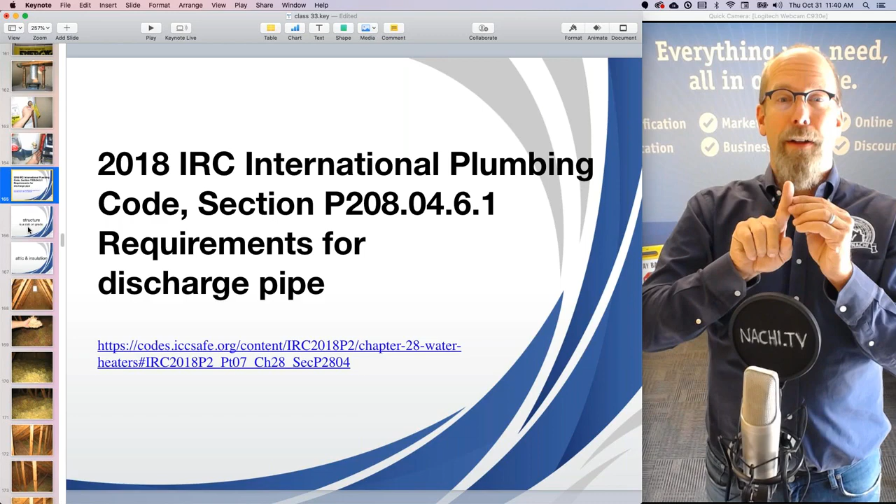There are 14 requirements—one of them is the TPR discharge pipe has to go down slope. I found one TPR pipe, actually many in my years of performing inspections, going vertical, up, right? That's no good, that's a defect. It has to discharge within the same room, within sight, has to be conspicuous, because if a pressure relief valve is discharging, it has to discharge where you're going to see it, since that's an indication of a serious problem. You can't discharge it outside into the gutter or underground where nobody can see it—it has to be in the same room, conspicuous, right there.

Structure—it's a slab on grade, so any picture I take of the lowest livable finished floor, that's the structure. I really can't see anything other than those little hairline cracks in the foundation.

Attic and insulation. When I get to the attic and insulation, wow, I'm moving along, doing really well. But I really can't enter this attic because it doesn't have a floor, so it's not safe. Fiberglass loose fill insulation looks kind of fluffy all over the place, a little disturbed here and there, probably because of the cable or phone technician. The structure looks good to me.

Trusses—if I see any modified, cut, or damaged trusses, that's no good. You can't modify, cut, or damage a truss after it's installed without a structural engineer taking a look at it. There's clips on the plywood, the particle board looks good.

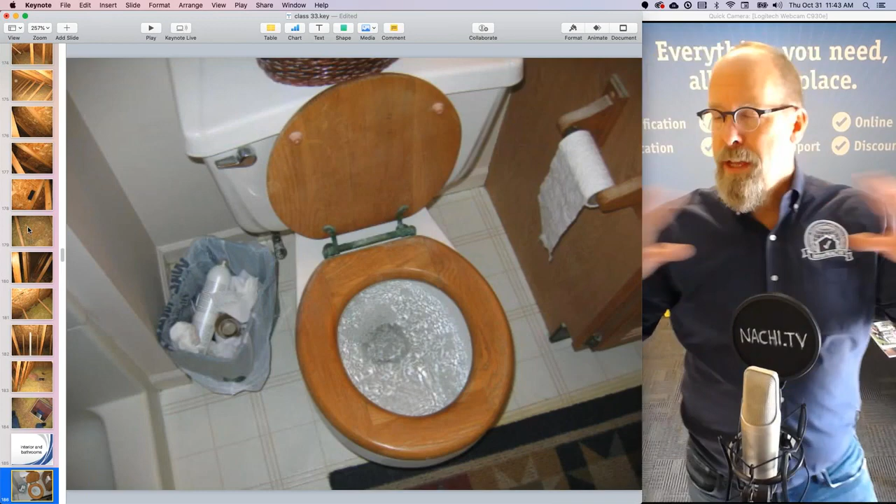Okay, interior rooms and bathrooms. It's very easy, maybe 15 minutes for all the interiors and all interior rooms and bathrooms. I think there's 2.5 baths in this house, and basically a bathroom is a couple minutes. You flush the toilets, use the side of your leg to see if it wobbles on the floor.

Flush the toilet, turn on the water, hot and cold at the sink, shower, tub, look for water leaks, look for functional flow, test the GFCI, look for a window or a light or a vent or a bathroom vent or something like that. All bathroom vents exhaust outside, and look at the surfaces. Very easy, in and out. Toilet, sink, shower, tub, shower floor, pipe, drain pipe, GFCI.

There's a stain on the vinyl because of the carpeting, and so there's a discoloration. It's a minor cosmetic defect. I'll put it in the report as courtesy. That's another cosmetic defect, an actual iron that has scorched the carpeting. I'll put that in the report as courtesy.

Open and close, representative number of windows, representative number of doors, representative number of wall receptacles. So I'll take a picture of what I did, take pictures of every room.

Any smoke detector without a battery backup is a defect. Any smoke detector that's yellow, that wasn't designed to be yellow, is a defect. It's an indication of age. And that one doesn't work, so I tested it, and it actually didn't work at all. So that's what that cross finger means.

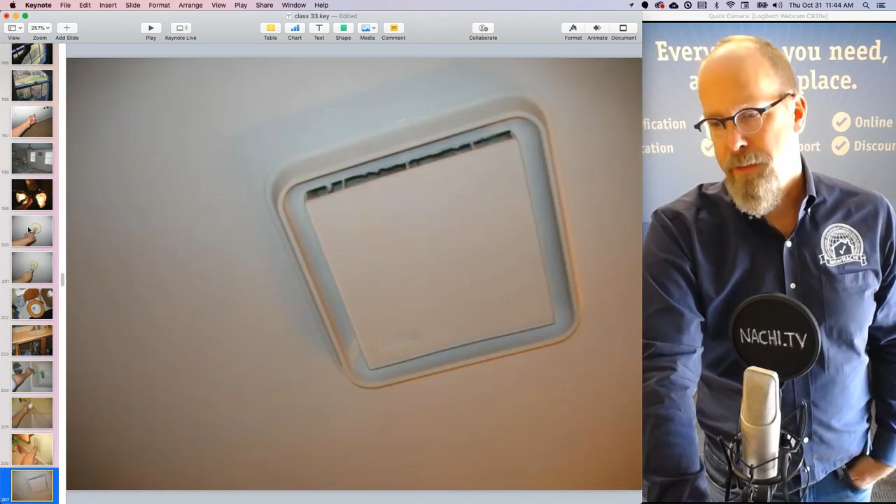Next bathroom, same thing, toilet, shower, tub, GFCI. I'm not really concerned about the plumbing traps. You're not supposed to have S traps, P traps are the standard. There's the vent coming from the second floor bathroom. Where the vinyl meets the shower or tub wall, I kind of push on it and see if there's any water damage there underneath the vinyl.

This floor has a cut in the vinyl. It's also discolored and stained, just like the other one. There is no plumbing access panel for the shower. No plumbing access panel there. I can't see the plumbing from the access panel. I like to have plumbing access panels.

Another bathroom, there's the S trap. So the sink is probably gonna gurgle. GFCI protection. The door doesn't really open and close very well, it's kind of sticky.

Oh, this is the door. Oh, this is the front door. Yep, so this is the front door, with a throw latch. Yeah, they don't really have a throw latch on a bathroom door. So that's the metal door, and it sticks. So that's what I'm showing there in the picture.

Windows, receptacles, I'm trying to wrap up. I know I have an attached garage, so I'm trying to get to the attached garage. There's a broken window feature, no big deal, minor. Looking at the corners of things, corners of rooms, corners of the laundry room.

There's the ceiling. I like to take a look at the ceiling below the second floor bathrooms, and there is a watermark there. So I'll call that as an active leak.

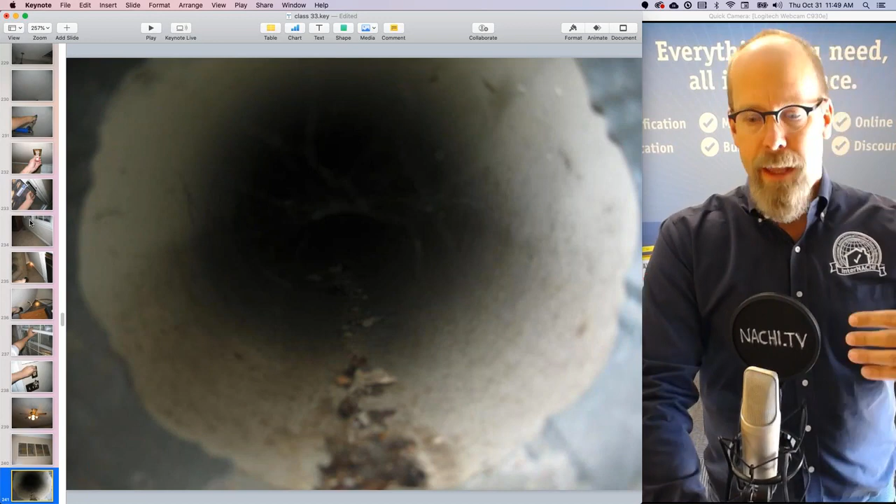There's the ductwork from a floor register. Sometimes I'll pull off a floor register, stick my hand in there, see if there's anything in it, or really a camera, and take a shot. Sometimes there's a lot of debris from when the house was built, and you'll see nails and wood and sawdust and a lot of things like that that may affect people who are sensitive to those things. And maybe if I saw a lot of construction dust and hair and all that stuff in the ductwork in one of the bedrooms that I randomly selected, I'll recommend a duct cleaning.

Fireplace. Remember the fireplace? We had the fireplace cap, the metal cap was rusted at the beginning of this presentation, remember? That was a defect. Well, I'm looking on the inside of the fireplace, looking for defects. It's sooty, so I open up the damper door because you're required to open and close the damper door to make sure it works. And when I opened it, a lot of soot came out, it's just filled with soot. There's an inch layer of soot on the damper door itself, and it's just stuck there. So we need a chimney sweep.

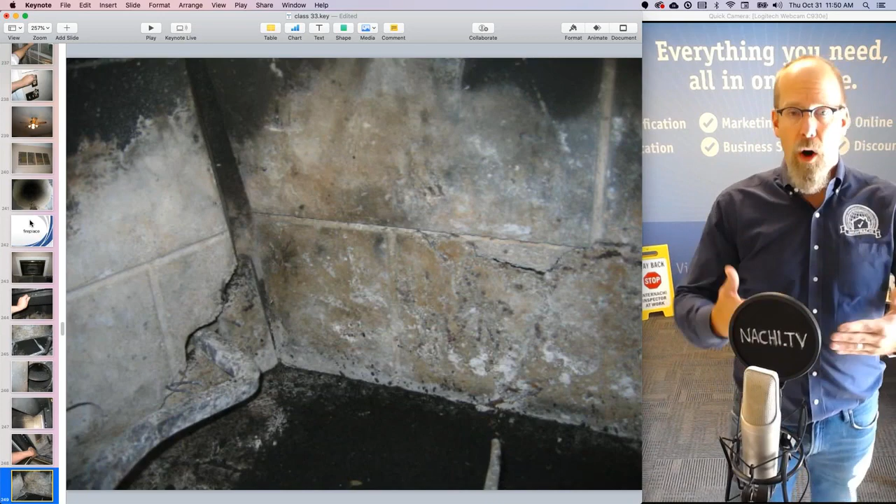That's great. And I'm looking for any kind of indications of rollout of smoke, that's no good, or damage to the firewall, and there is. So there's significant major damage to the walls of the factory-built fireplace. This isn't a brick fireplace, it's a factory-built fireplace, and those panels can be replaced, and they really need to be replaced.

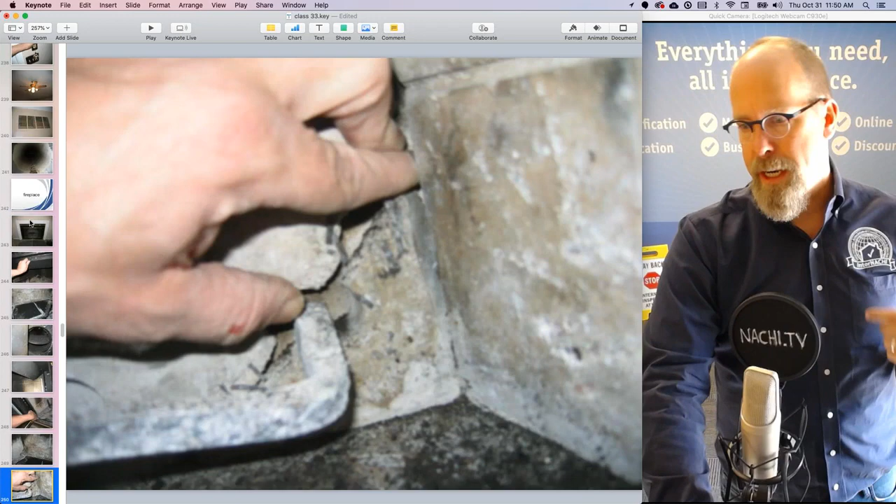You cannot have breaches in that firewall and have a fire, it'll just catch the chimney on fire. So you're really saving somebody from a fire. You can see there's a lot of damage there. I'm trying to take a close-up shot of it, and there's a really good close-up shot. You can even see the...

Reinforcement metal wire mesh inside this 1.5 inch thick firewall in the factory-built fireplace. So take a look in there. Remember, as you can see from my pictures, I started off away, then I moved in a little bit closer, and then I got to touch it. And by the time you get all the way to touch it, you already can see that what you want to focus on is the defects that are both observed and deemed to be material.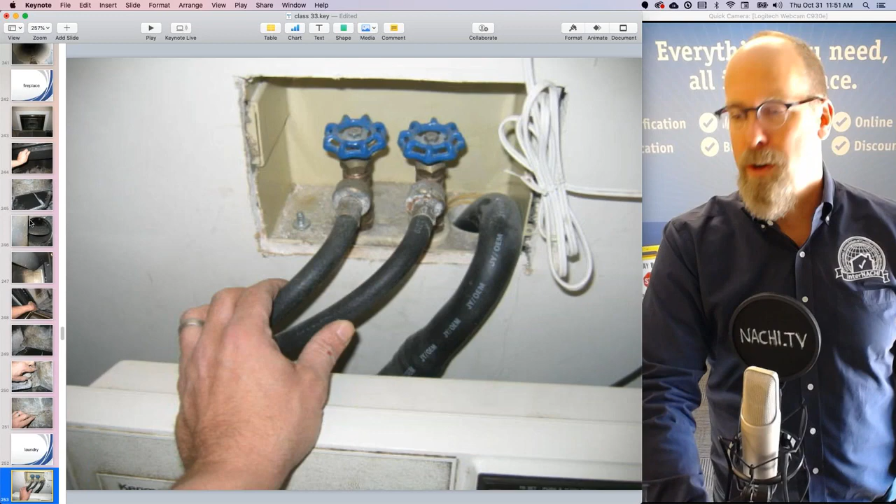The dryer outlet - this is an older house, older inspection, so those have changed. There's a water catch pan underneath the clothes washer, which is great, but it's actually damaged, so the rim of the water leak catch pan won't catch any water leaks.

Here's why there was displacement of the panels we observed earlier in the inspection. It's because we're missing actual nuts and fasteners on the hinges of the garage door panels. A couple are missing, that's why it's loose and sounds wrong when you open it. There's just loose, missing nuts, washers, and components on the garage door. That's a great catch.

Be careful opening and closing it. There are 10 steps to inspecting a garage door opener attached to an overhead vehicle garage door, and you can follow those steps easily so you don't have to remember them, using your mobile device checklist. We have courses and videos on how to inspect a garage door opener in those 10 steps, so take a look at InterNACHI's free online courses and videos.

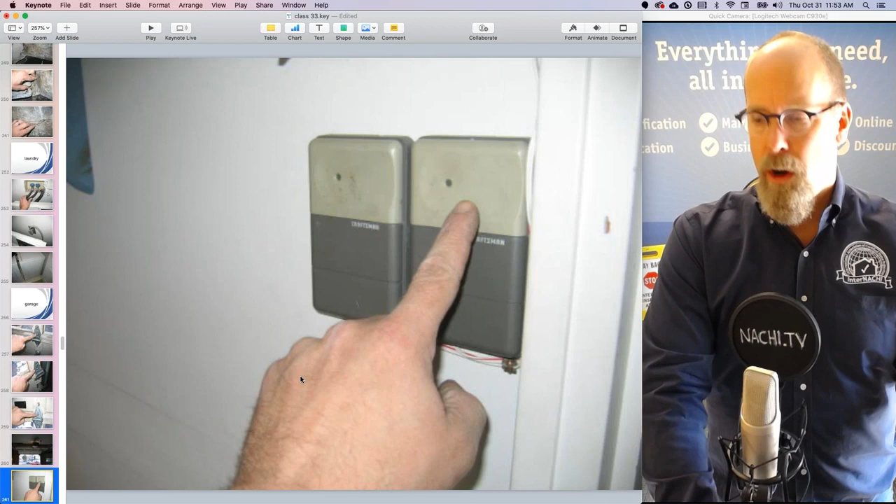Using normal operating controls, open and close, check the mechanics - that's the first step. You check for the red handle release, and then for the rest of the garage, all receptacles have to be on a GFCI. The main electrical panel is also in the garage.

I'm looking at all the corners for damage, water damage, insect damage. Remember, we had siding above the bottom that was buried by vegetation or mulch and ground with no clearance, so I'm a bit concerned. This is my opportunity to look at the structure of the home, since the rest of it was finished with no crawl space or basement.

I want to demonstrate with this picture that I tried to see everything, but I really can't - there's so much in my way. A visual inspection is really limited and restricted, and a picture's worth 1,000 words. So if I got sued or brought into court, or had a complaint, I would show that this is what I was working with at the time of the inspection. It's very difficult to see everything.

So I'll take a picture of my flashlight in my hand along with that, just to demonstrate that I'm really trying to look and see everything about the structure, and maybe how the bottom plate is attached to the foundation.

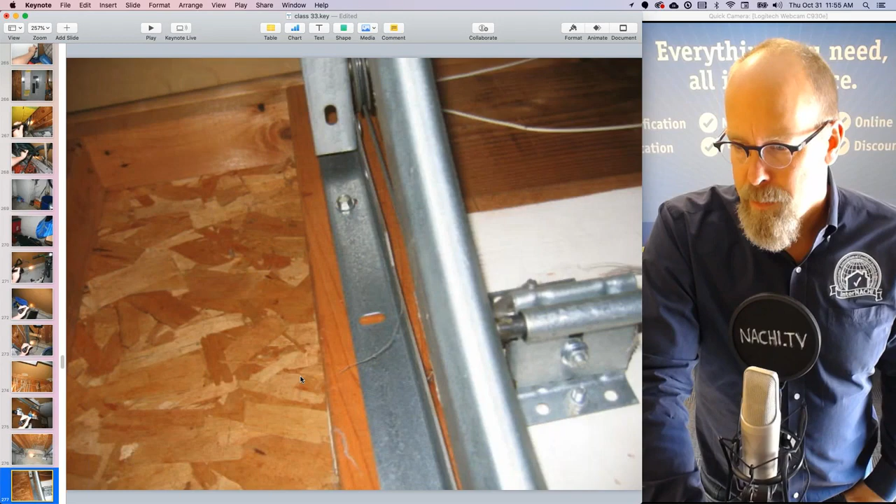I take pictures of a lot of things in the garage, all the surfaces. The floor has a hairline crack, no big deal. But in this picture, there's a major defect - can you see what it is?

I'm just looking at the questions. No, not anticipated in this inspection. Okay.

There's a firewall breach in the garage ceiling. You can't have exposed wood and an opening with pull-down stairs in a garage. This may have been installed by the homeowner or the builder, doesn't matter, you can't have it. You can't have this in the ceiling of a residential garage. A fire starting in the garage will blow right through this and spread throughout the whole house. There's also damage to the drywall here, and you can't have damaged drywall either because a fire will find that breach.

So that's what it looks like. And here's the attic above the garage - wiring and all that stuff, and up there, the radon fan. We can take a look at that and see if it's compliant with modern standards for a radon mitigation system.

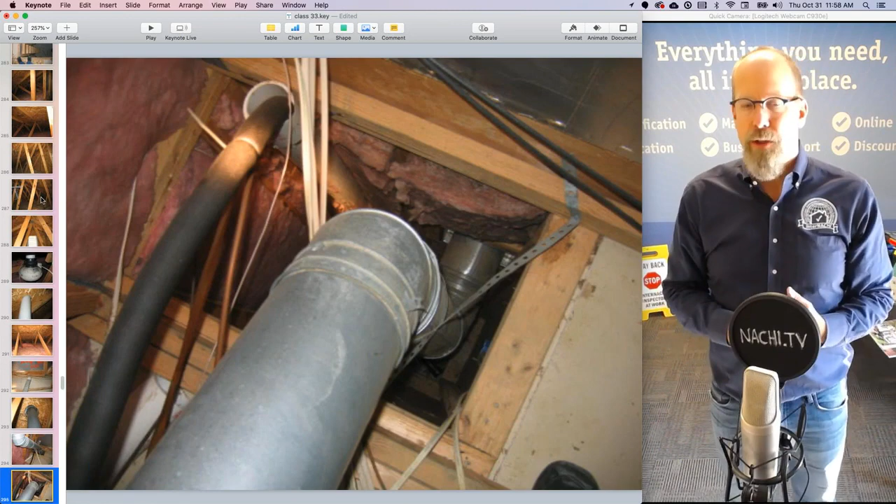And then there's the chase. This chase comes from that furnace room. You can see that some of the walls are insulated and some are not. The walls that are not insulated are the walls in the garage, and the ones that are insulated are on the other side of conditioned rooms. We don't want conditioned air escaping the house and being chased up, essentially. This is a stack, and there's a natural physics thing in buildings where air tends to have a stack effect. Every building has a stack effect where air is sucked in from lower areas and exhausted out naturally, sometimes by pressure, and sometimes unintentionally. Stacks like this should be sealed up to prevent conditioned air from escaping outside. So that's a home energy efficiency opportunity.

If I was inspecting the home and certified through InterNACHI as a home energy inspector, I would turn to my client and say, while I'm here, would you like me to report upon some energy deficiencies I observe and opportunities to save energy with insulation and air sealing?

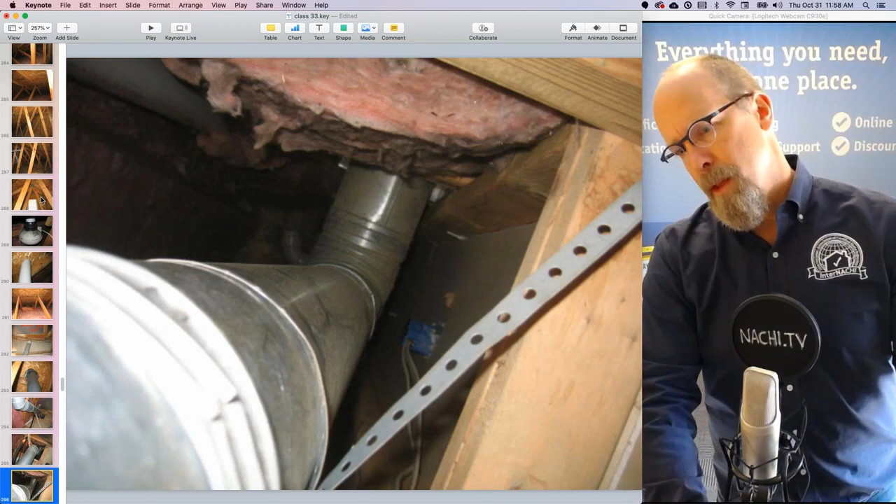There's that damaged drywall. Somebody stepped on it or stored something up there. So that needs to be fixed, and that's the surface.

Electrical panel, it's in the garage. You're not required to remove the dead front cover. Don't - it's hazardous, could be fatal. So don't do it. But I opened up this one. You're not required to do it by the standards of practice.

What I'm looking for are major problems, like the easy defects to find are breakers that are really fat, big breakers, like a 20 or 30 amp breaker on a small gauge wire. And got one - here's a 20 amp breaker on a 14 gauge wire. That's an improper size, that's an ampacity problem, that's overfusing. In our electrical course, how to perform a residential electrical inspection, this is gone over a couple times. So you want to identify those defects - you don't want a big breaker connected to a small wire.

Kitchen - I end my inspection in the kitchen because that's where everybody likes to hang out, talk, and have coffee, and hopefully something to eat for the home inspector. So I'll inspect the kitchen last, and that's where I'll wind everything up, I'll summarize, go over everything, and get paid. And then we shake hands and move on.

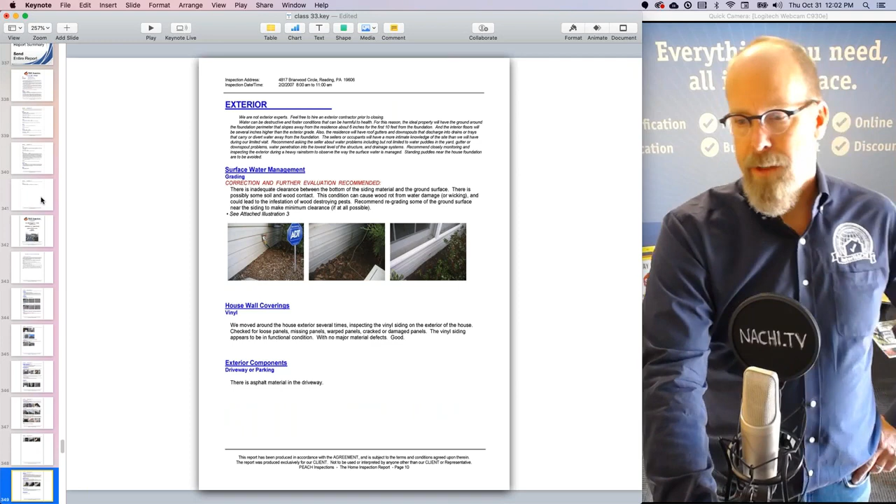And there's the leaning posts of the rear patio structure, a wooden structure.

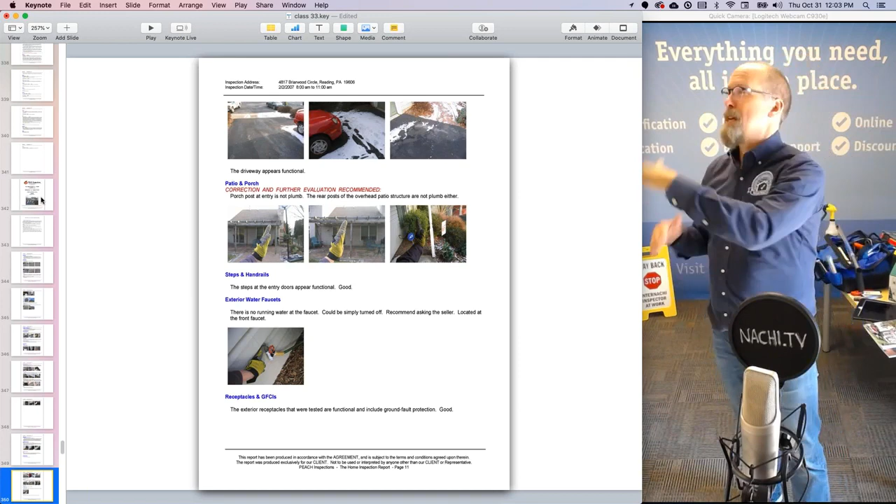What I do is write my reports in the same sequence as I inspected, which is very similar to the standards of practice sequence. The first section, the first chapter of my report, is the roof - that's the first section of the standards of practice and the first system I actually inspect. The second system I inspect is the exterior, which is the second system of the standards of practice, and the second chapter of my inspection report. It's also similar to the InterNACHI home maintenance book - now that you've had a home inspection, house problems are yours.

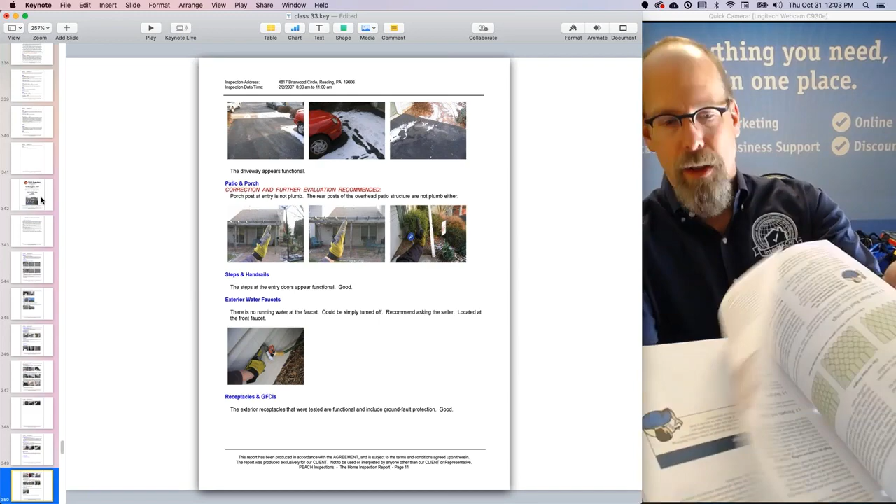It's basically the gist of the home maintenance book, and inside it's a really nice home maintenance book. It's only $2.70 each, and it adds weight to your electronic report. It also has about 10 or 12 different reasons to hire you again, to come back every year to inspect the house.

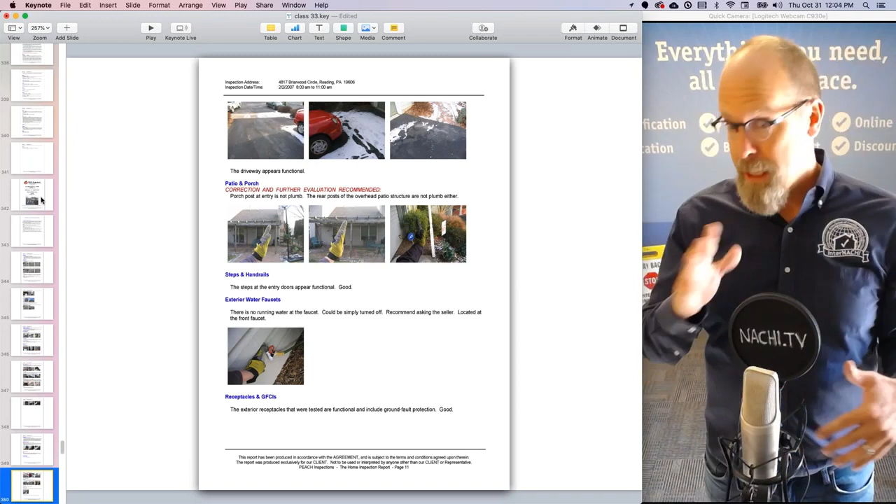Every chapter of this is kind of reflective of my inspection process as I move through the house, so that gives the client consistency. Like, oh, I remember going through the house, then we went down to the basement and here's the report of the basement, then we moved up to the attic and here's the inspection report of the attic comments. So there's a nice flow and consistency there.

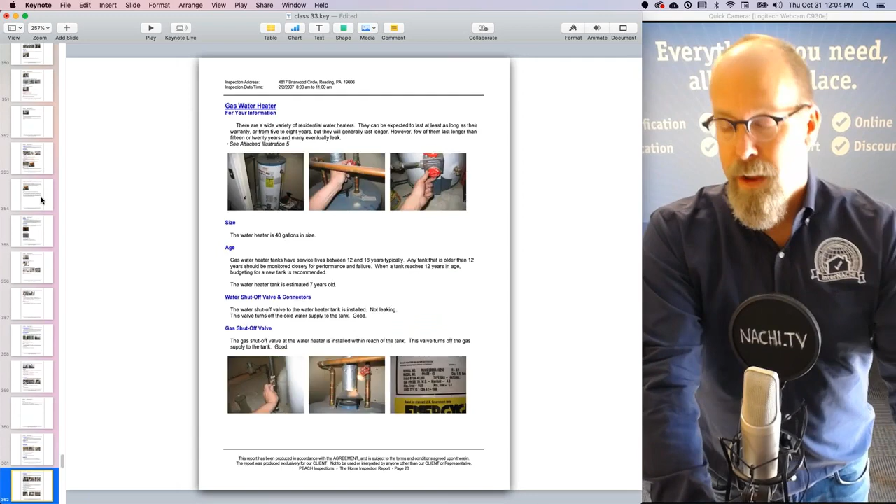So there's the air conditioning, a lot of correction and further evaluations. So wherever there's a recommendation in the report, like a monitoring recommendation, it's in red, all caps, italicized, and bolded. I want to get my attention, I want to get my client's attention whenever I made a recommendation.

Everything else is black or blue ink, it just describes things, like here's the electrical system, some narrative disclaimers, here's the meter, it's in good condition, grounding outside, main electrical line, location of the panel, and then breaker labeling. Most of the breakers are labeled, not all of them. They all should be more clearly marked, so that's a recommendation there, in red ink, bold, all caps, italicized.

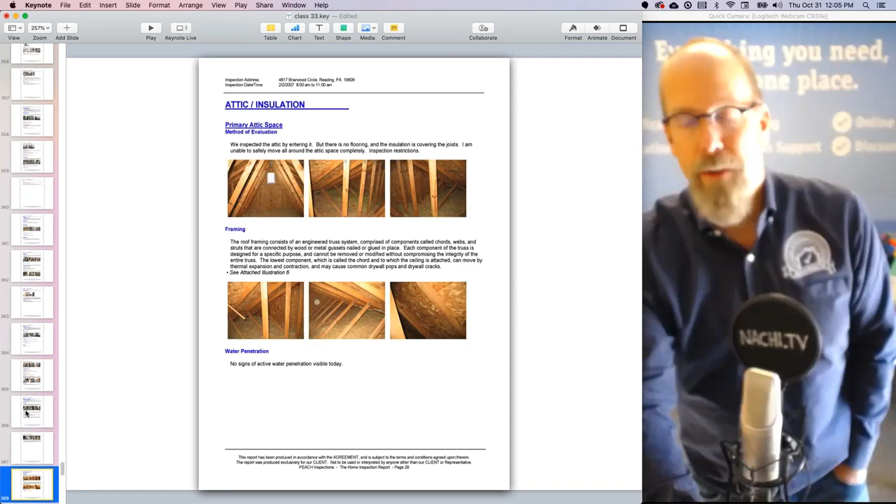It's just a recommendation, not a requirement. It's really up to you and how you report your defects, but any type of recommendation was all red. So here's monitoring recommended, improvement recommended, improvement repair recommended, correction and further evaluation recommended. That was for the water leak catch pan, which should be replaced. The rest of the report looks like that.

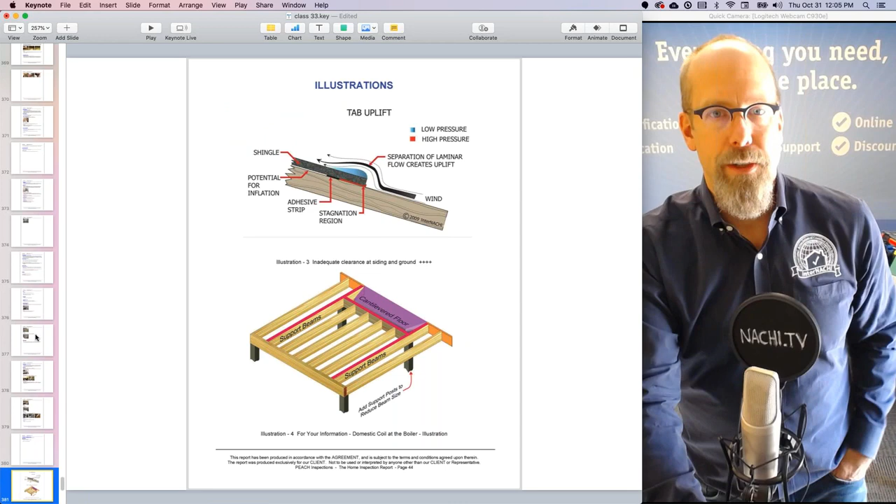And there's the kitchen. There's some illustrations, and you can get those illustrations to spice up your inspection report from InterNACHI. They're free, downloadable, high res if you want, at nachi.org/gallery if you want to boost the look of your inspection report.

There's a final report conclusion and walkthrough, and there's a letter from my company to the homeowner that we left. And you could also do creative things like this.

This is from the InterNACHI member marketing team, a little lunchbox that says 'We really appreciate you.' There's your business card: 'Thank you for allowing us to inspect your home, look inside.' This is for the homeowner when they come back, maybe after work, after the inspection is over and we're out of there. They open up the lunchbox, and what's inside? Well, that's really up to you, right? There could be some marketing material about, 'Hey, I just inspected your home, I took care of it.' Maybe request a copy of the inspection report, and you'll see that I'm the best inspector in the whole world, yada yada. If you're moving in the neighborhood, I can be your home inspector, something like that. Because every seller is a potential client.